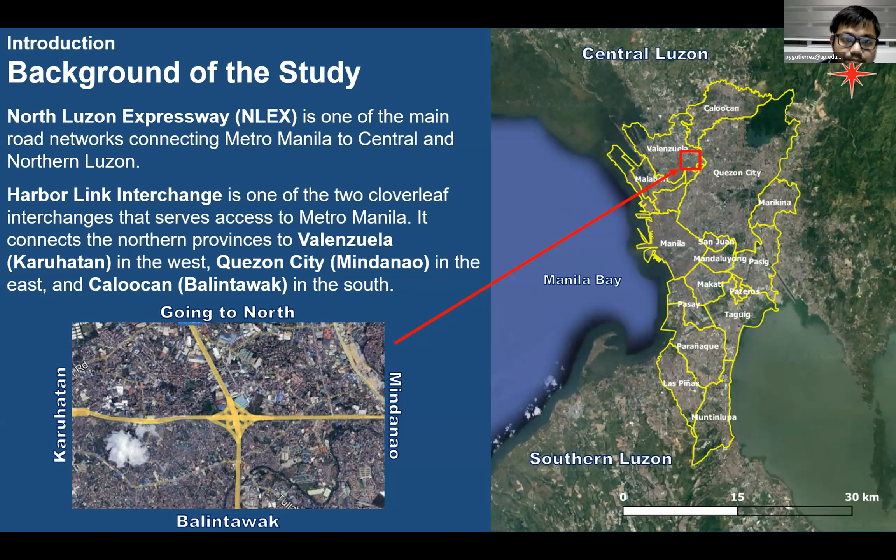For the problem statement, the general problem of this Harbor Link interchange is that with the growing economy of the northern and central Luzon, and the Port of Manila's growing economic activity, the Harbor Link interchange is the critical point of those two locations, because the Port of Manila has direct access to this Harbor Link interchange.

So if you're coming from the Port of Manila going to the north, you will pass through this interchange on the North Luzon Expressway. As indicated in the image, the blue line represents the path flow of vehicles from the Port of Manila, on the Karuhatan side, going to NLEX North. They have to use the southeast loop to go to the north.

This path flow conflicts with vehicles coming from the north going to the east side, toward Quezon City. The yellow path flow uses the southwest loop going to Quezon City, or the Mindanao area. This conflict creates a weaving section which reduces the capacity of the cloverleaf interchange and forms a queue of vehicles, as you can see in the sample photos below.

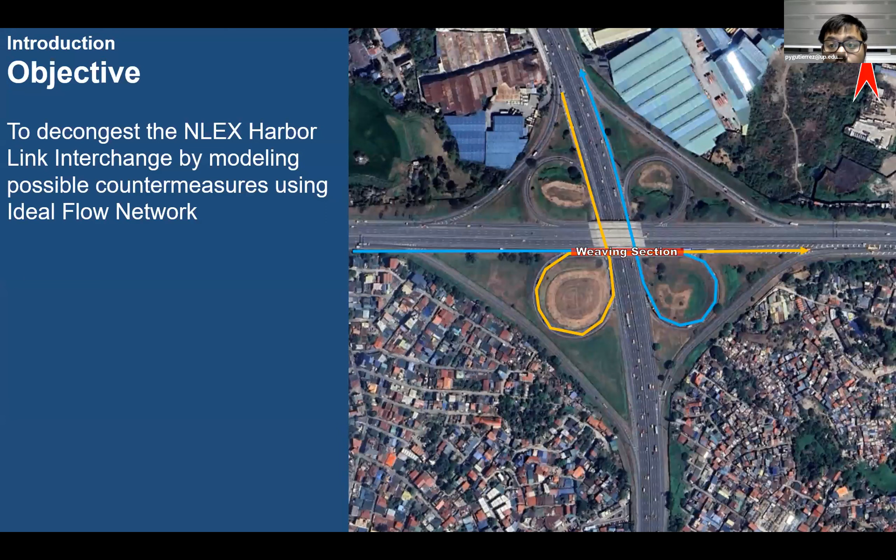The objective of our study is to decongest the NLEX Harbor Link interchange by modeling possible countermeasures using ideal flow network. Our hypothesis is that by increasing the capacity and decreasing the demand of the interchange traffic flows, the traffic flow and congestion levels will improve in this area.

So for just a brief review of related literature regarding the cloverleaf interchange. For the information of everyone here in the room, an interchange is a grade separated intersection to eliminate crossing conflicts through vertical separation.

As you may understand, in an expressway, the priority is mobility rather than accessibility. So they have to grade separate a crossing intersection in order to reduce conflicts, especially the left turning conflicts.

The rationale for the cloverleaf design is that it consists of a multi-level interchange at which all left turning movements are performed using loop ramps. The cloverleaf interchange consists of 4 loop ramps in all 4 quadrants with no traffic control.

The traffic control explained here is that there are no traffic signals, signalizations, or any other traffic control devices. So the purpose of the cloverleaf design is to allow unhampered connectivity for all movements between the 2 highways, described here as the highways above and below.

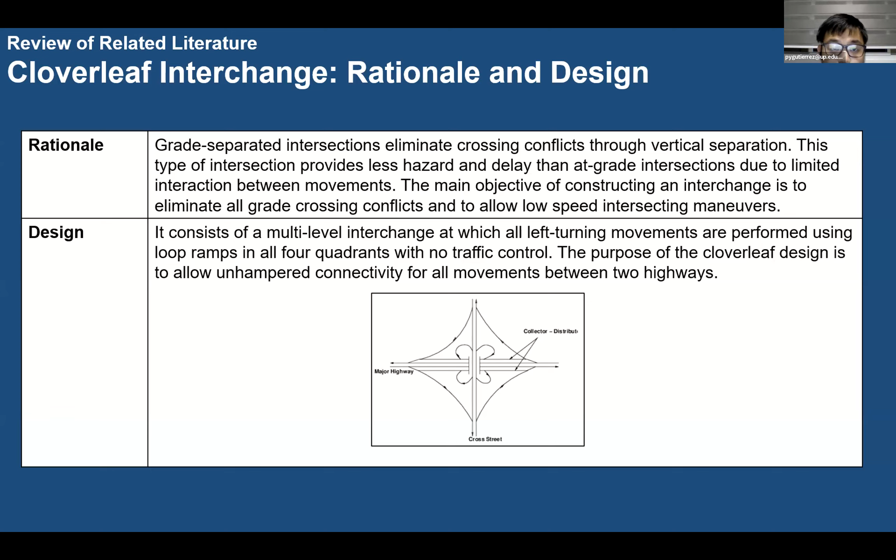For the methodology of the study, we have gathered relevant traffic and historical data, and then conducted traffic surveys. After reviewing that data and conducting the traffic survey, we analyzed the data and characterized the traffic composition that we gathered.

We have identified the peak hour, and then developed the flow and OD trip matrix of the area. Then after generating the OD matrix, we proceeded to the next step.

We did the IFN model: input of the road network characteristics, and input of the traffic data into the IFN model. Then next, we assessed the base scenario.

In the base scenario, we identified the current level of service situation, and then identified the conflict points and bottlenecks in the interchange.

After identifying those characteristics of the base scenario, we formulated an alternative, or improved, scenario.

We analyzed that alternative scenario to test if it is effective. If not effective, we go back to formulating another alternative scenario, which could be an iteration of it, or a policy introduction or other improvements. If the scenario is already effective, then we go to the conclusion and recommendations.

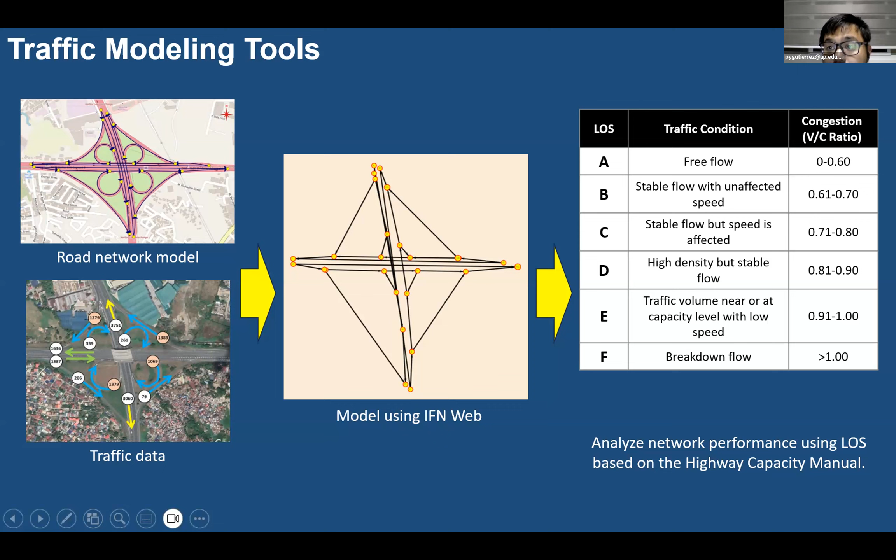So the inputs of the IFN—the nodes and links—are prepared using GIS. In the IFN model, there's an available OSM map, but during our consultation with the Professor and while learning to use the program...

the loop ramps, and not just the loop ramps but the other ramps as well, are not modeled in the OSM. So we used another GIS program, which is QGIS.

Here are the assumptions that we have. Actually, these are not assumptions, but rather the calibrations that we used.

For the ramps, the capacity that we used is 1,500 PCU per lane per hour, with a speed limit of 40 kph. And for the main carriageway or main line of the expressway, we used 2,500 PCU per lane per hour, with a speed limit of 100 kph.

These are expressway standards, and the values were obtained from the Highway Capacity Manual. Next, we input the flow matrix to calibrate the model.

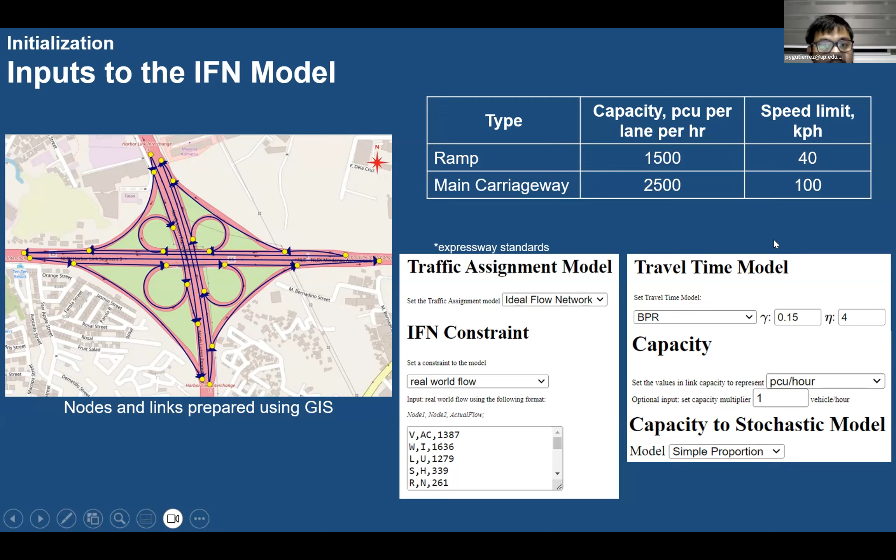In terms of turning volume, the high number of vehicles are using the southwest and southeast cloverleaf loop ramps, which was identified in the problem statement—that is, 1,379 and 1,069 PCU per hour.

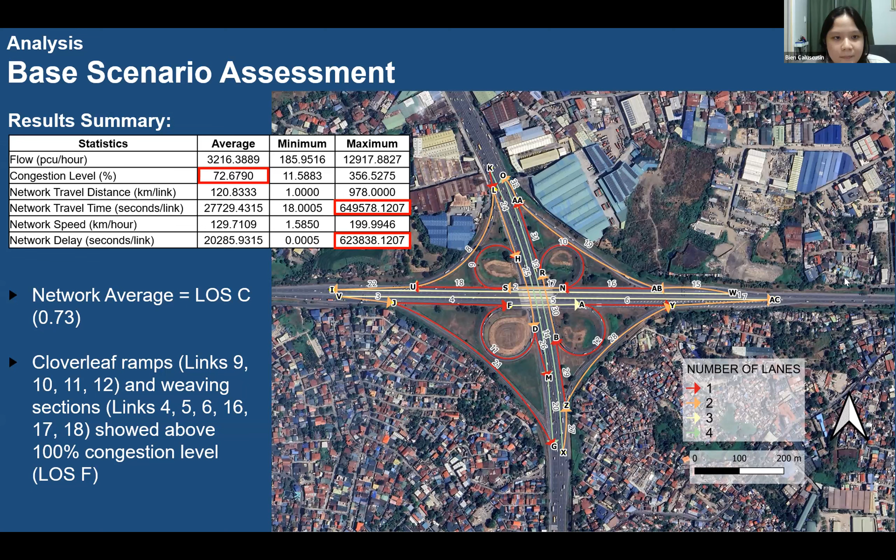As discussed, this is the visual representation of the LOS congestion for the base scenario. As you can see, all four loops have LOS F. The network suffered due to bottlenecks caused by sudden reduction of lanes and the limited capacity of the loops, since they all consist of one lane only, and the speed limit is only 40 kph. Hence, they can only serve a limited number of PCU.

These are the identified bottlenecks and weaving conflicts, which will be the focus of widening for our first alternative scenario.

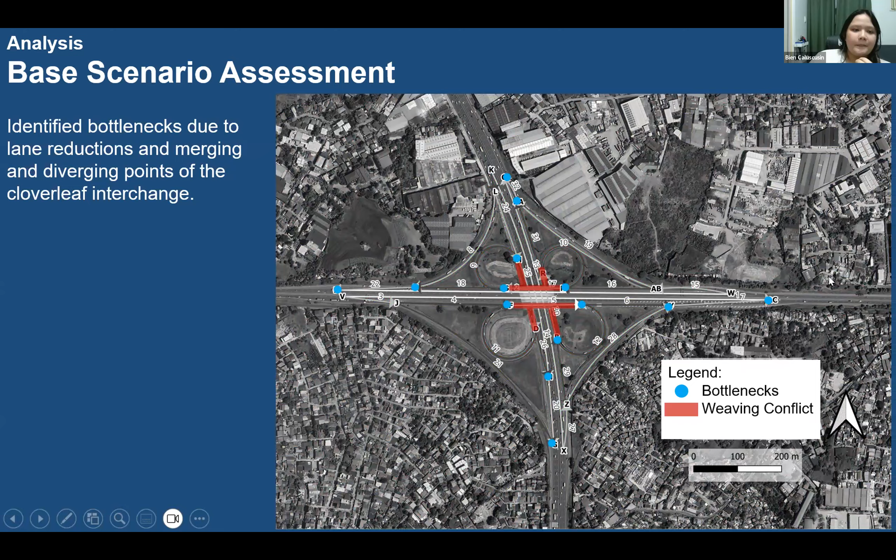For our first alternative scenario, we are proposing lane widening for the identified conflict sections, particularly the loops, all four loops, and the receiving links, including the weaving sections. We will be increasing the lanes of the loops from 1 to 2 lanes, and we'll be adding 1 lane each for weaving sections and receiving links to prevent funneling due to the sudden decrease of capacity.

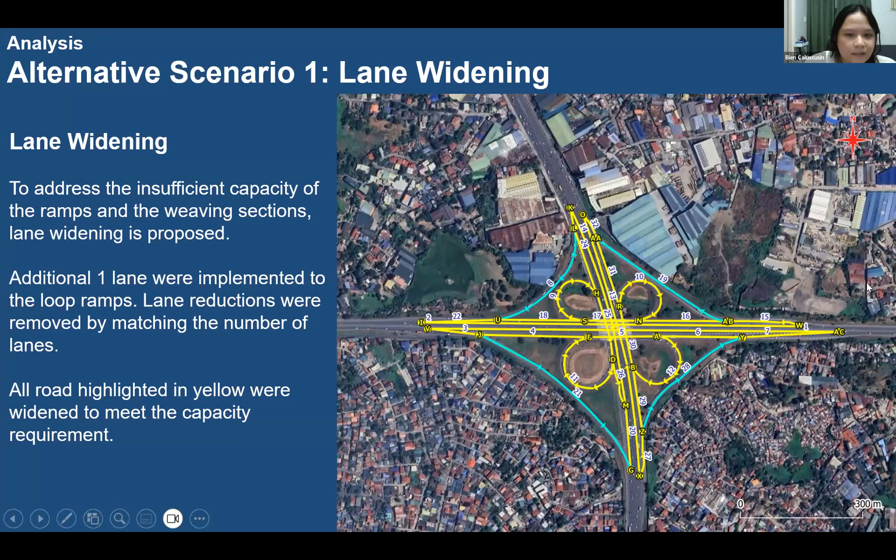For the results, this yielded a better overall network performance of almost 48%, or LOS A. However, 11 links are still experiencing more than 100% congestion.

With this, we will be assessing in the next slide additional widening to assess the further impact of capacity increase.

Wherein we added additional lanes to the identified conflicts. However, this only yielded an increase of 7% of overall network performance, and most loops are still classified under LOS F. Only one loop has a congestion of less than 100%. With this, we shall explore other countermeasures not limited to lane widening.

For alternative scenario 2, we are suggesting a bypass road from the west to the north, considering the high amount of traffic from the west, or from the Karuhatan and port area, to the north, going to Bulacan, Pampanga, or the further parts of North Luzon. This is to lessen the number of users in the cloverleaf loops.

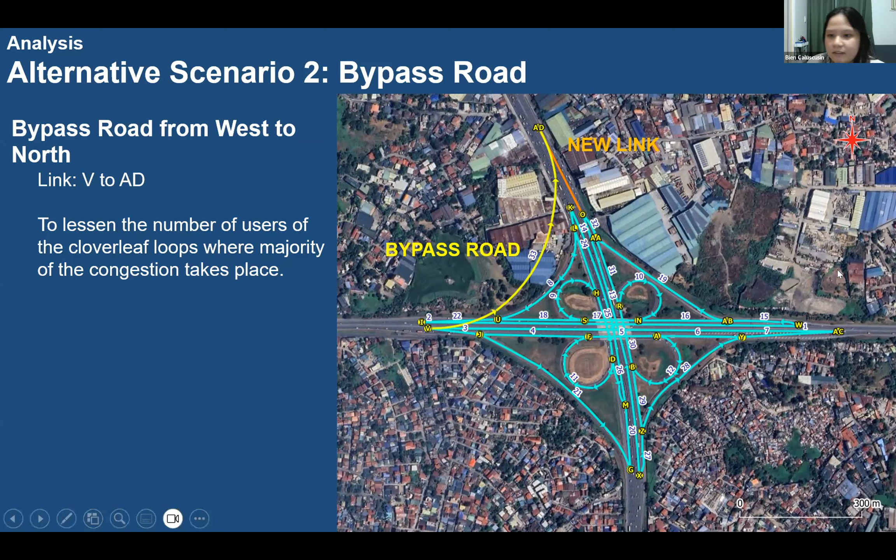However, this bypass scenario yielded a higher resulting congestion level, which could be attributed to the increase in total flow due to the additional links introduced without increasing capacity. With this, I will turn over the floor to Katrina for other alternative scenarios, which are not limited to physical interventions. Thank you.

Good evening, everyone. Since the two previous alternative scenarios may not be sufficient to solve the congestion in the network, the first policy we considered is congestion pricing. We found related literature stating that congestion pricing in Metro Manila, this is a Metro Manila study also, is expected to decrease traffic demand by 24%. So we applied this reduction to the traffic flows, and the result is on the next slide.

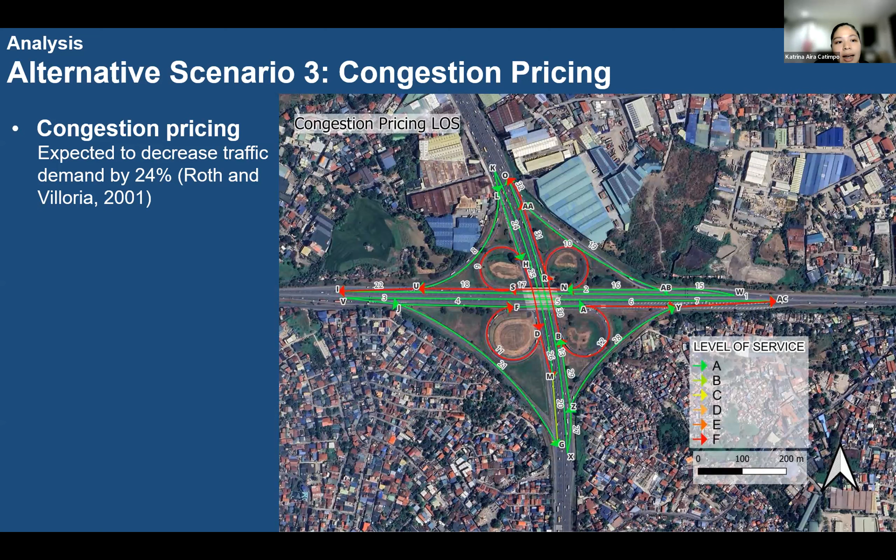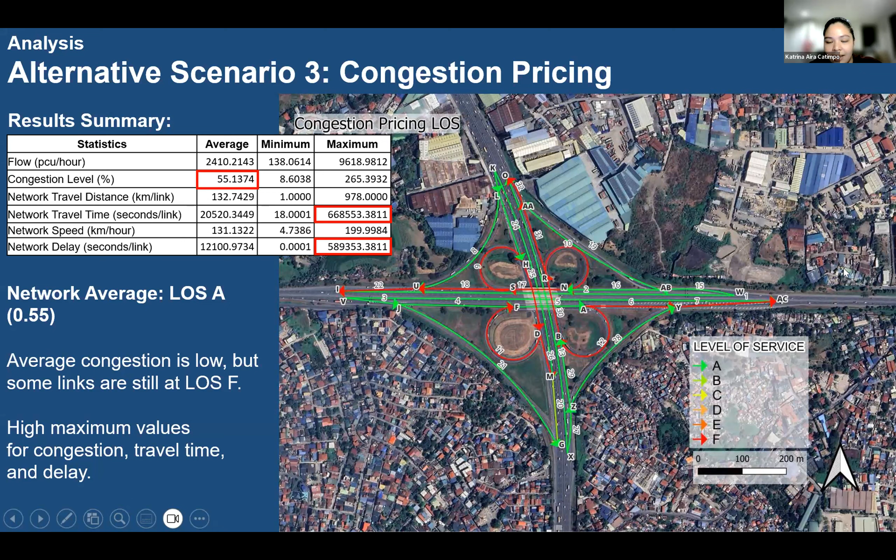The congestion level of the entire network is at LOS A, at 0.55. However, there are still links that remain LOS F, specifically the cloverleaf loops and the receiving links of these loops. So even if the overall performance of the network is good, some links are still left behind, and the maximum values for congestion, travel time, and delay are still extremely high.

For the fourth alternative scenario, we tried to combine lane widening and congestion pricing. This resulted in a network average of 0.34 congestion level, or 34%, which is equivalent to LOS A.

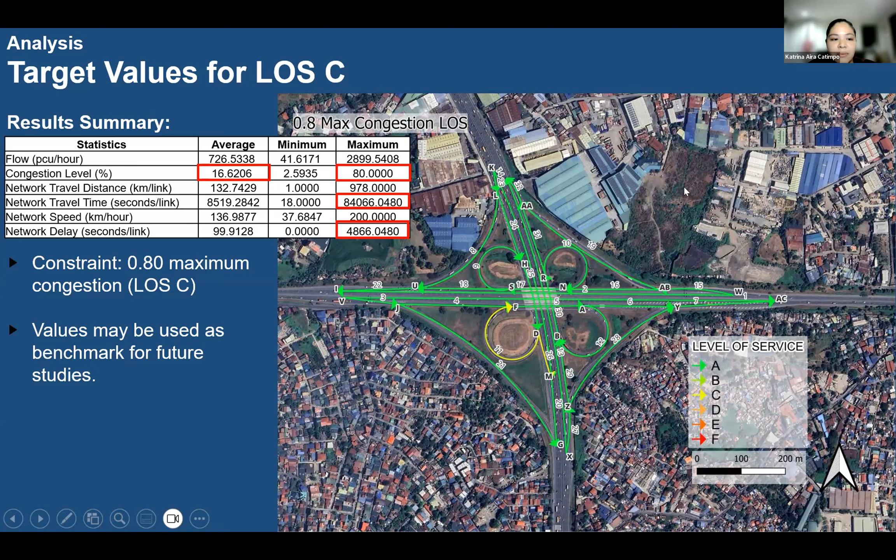Based on the results of the previous alternative scenarios, we are still a bit far from the 0.8 maximum congestion target. So in the future, more policies or countermeasures may be further explored in order to improve the results. Next slide.

Here is the summary of our conclusions and recommendations. First is that the most effective scenario of the four we modeled is the combination of lane widening and congestion pricing.

However, we have a disclaimer that lane widening may entail high costs for right-of-way acquisition, construction, and operation. It may also induce additional traffic that will further congest the road network as time goes by. Also, even if the LOS of the entire network is within the acceptable range, there are some links that experience congestion, long queues, and extended travel times.

As discussed in class, we can also explore traffic redistribution methods. And lastly, other measures may be considered, such as a proposal of a different interchange configuration, encouraging the shift to public transport, and other traffic management policies.

So that's it for our report. Yes, this is excellent. Thank you. Is there any comment or question from other groups? Go ahead, please. Anyone?

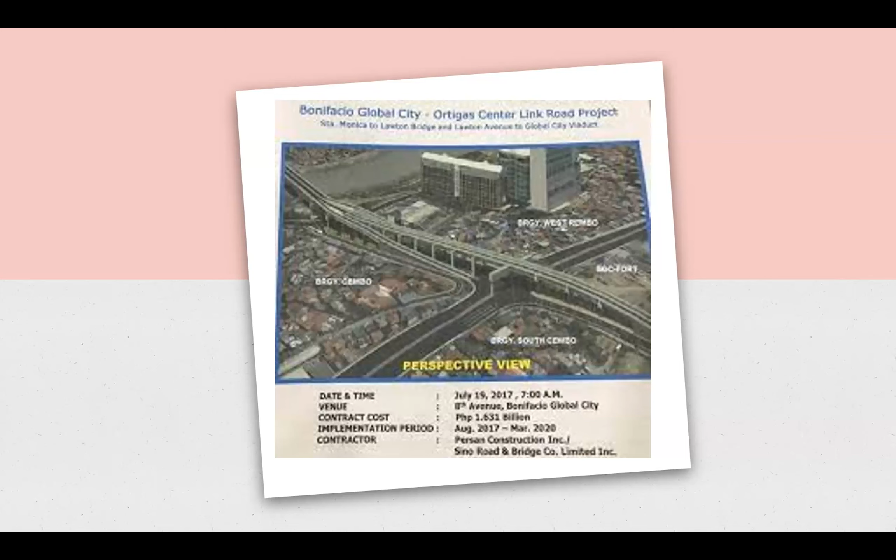Some background on the area: Kalayaan Avenue Lawton Bridge is part of the BGC Ortigas Center Link project, aimed at reducing travel time between BGC and Ortigas Center to 12 minutes, down from a projected 30 minutes to 1 hour. That's quite a big ask. This is part of a bigger government project tied to EDSA's decongestion program, which aims to bring EDSA traffic down to around 288,000 cars per day by introducing other roads for traversal instead of EDSA. This area is relatively busy during rush hours, and traffic has worsened after construction of the BGC Ortigas Bridge, introducing congestion to relatively narrow streets, especially on the Ortigas side.

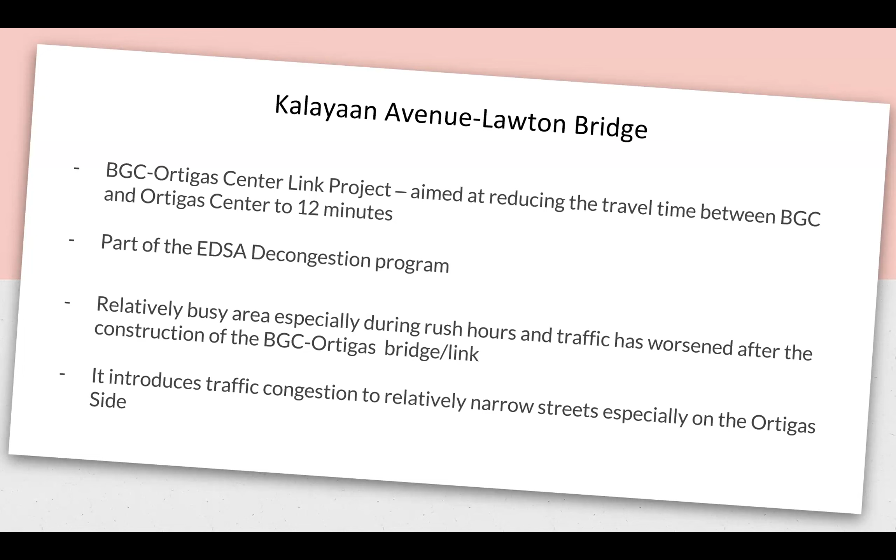The methodology of this project is to simulate the flow in the area using a transport model, to address congestion and provide alternatives. The main method used was the IFN transport model with real-world data derived from OpenStreetMap, and through GIS, the OpenStreetMap data was manipulated to input into the IFN transport model.

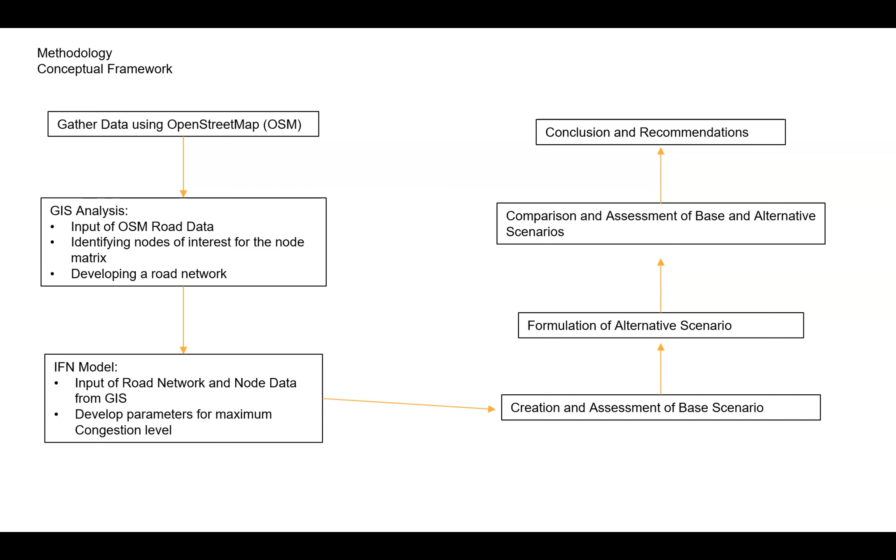This is the conceptual framework: first, we gathered data using OpenStreetMap, then using GIS analysis we input the OSM road data and identified nodes of interest for the node matrix. After that, we developed a road network in GIS to input into IFN. For the IFN model, we input the road network and node data from GIS, and developed parameters for maximum congestion level. Next was creation and assessment of the base scenario, then formulating the alternative scenario, comparison and assessment of base and alternative scenarios, and finally conclusion and recommendations.

For the assumptions on the link matrix, we use the data imputation settings in IFN so that we can estimate the link capacity, the max speed, and the road width for every single link.

I was able to come up with one alternative scenario. As you can see on the left side, this is the alternative scenario.

What I did was I added the U-turn slot at the 8th Avenue corner 38th Street on the bottom of the model, added extra lanes for Fairlane Street on the Ortigas side and Lawton Bridge, and then transferred the U-turn slots in Kalayaan Avenue on both sides further away from the intersection.

So I had to change the length of the links, and then added Brixton and Pioneer Street to balance out Fairlane on the upper side of the model.

Here's the output for the alternative scenario. The total flow is set at what the previous base scenario was, the sum of that - 131,811.68. Running through the model, we found that the alternate scenario has a maximum congestion of only 78.45%.

as opposed to the previous 90% from the base scenario. The congestion level before in the base scenario was at 47%, and the average this time is 35%, also a 12% reduction from the base scenario. The network speed is at 56.23 kilometers per hour, which is slightly better than the base scenario.

Here are the comparisons of the previous model. I added Pioneer and Brixton streets on the upper portion of the model in order to decongest the area on the flyover.

Rather than just directly going into the final result, probably you can tell the story. How did you get this alternative scenario? Oh, okay. Do I tell them right now?

First, I added a U-turn slot at the 8th Avenue.

On the bottom of the model, you can't U-turn here from the bottom. You have to go to 38th Street to go back to the bridge. So I added a U-turn slot there. I don't know if that's legally impossible, but I added that.

And then for the area with the orange street, I transferred that. In the base model, the U-turn slots are usually closer to the intersection.

But in the alternative scenario, I moved it further away into Kalayaan Avenue, so the links are no longer suppressed or compressed.

After doing that, I found more congestion on the upper area, so I had to do a lot of manipulation into the base scenario. That's why there's a lot of links and nodes added here.

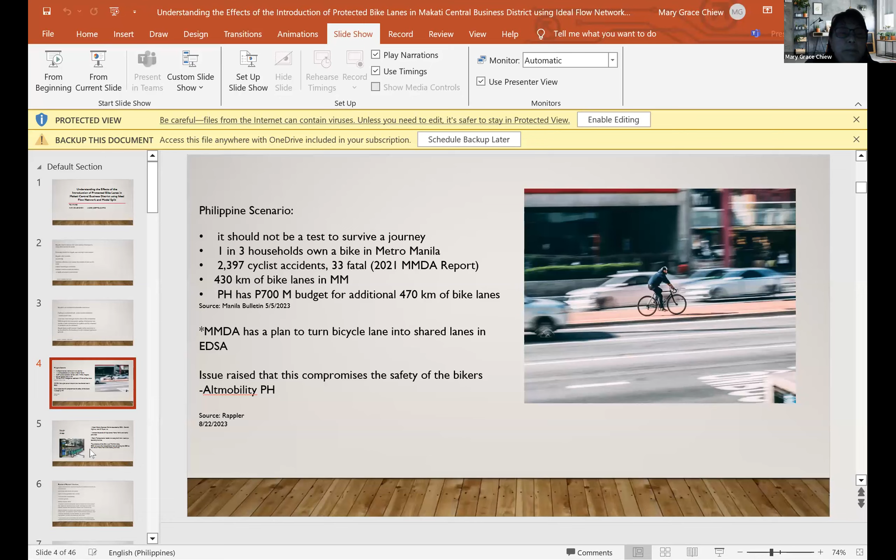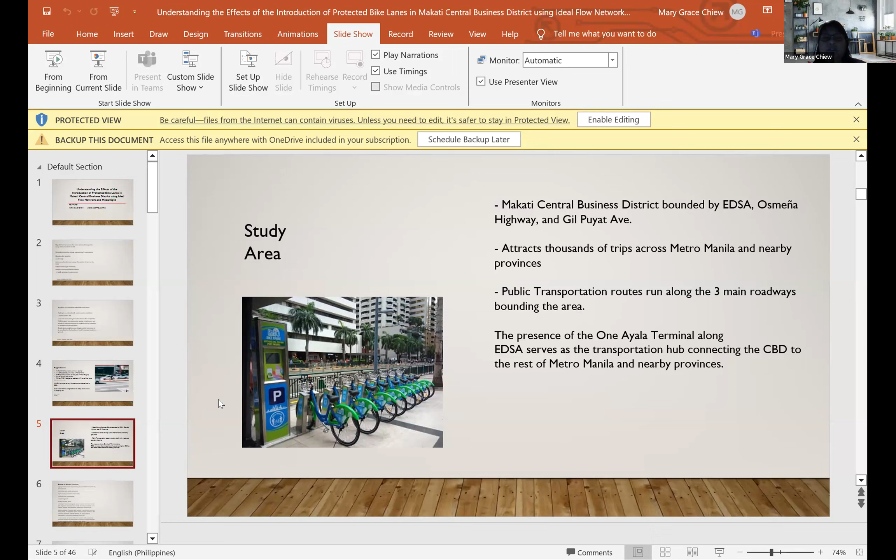Our study area is the Makati Business District bounded by Osmeña Highway and Gil Puyat, which will be explained in detail by Andre later on. It attracts thousands of trips across Metro Manila, and there is a presence of one Ayala terminal that serves as a transportation hub, with public transportation routes along three main roadways bounding the area.

We did a literature review, and most literature highly recommends implementing bicycle facilities towards city development. One study in Metro Manila on the economics of implementing bike lanes did a review on bicycle policy, and their results show that implementing bike lanes resulted in reduced crash risk, improved cardiovascular health, decongested traffic, created less carbon footprint, and increased tourism and employment.

The implementation of policies and facilities is predicted to resolve heavy traffic, air pollution, citizen cardiovascular problems, and vehicular accidents in Metro Manila, as well as reduce expenditure on both individual and city levels. They recommended that more policies are needed that cater to both cyclists and motorists to achieve an efficient citywide cycling transport system.

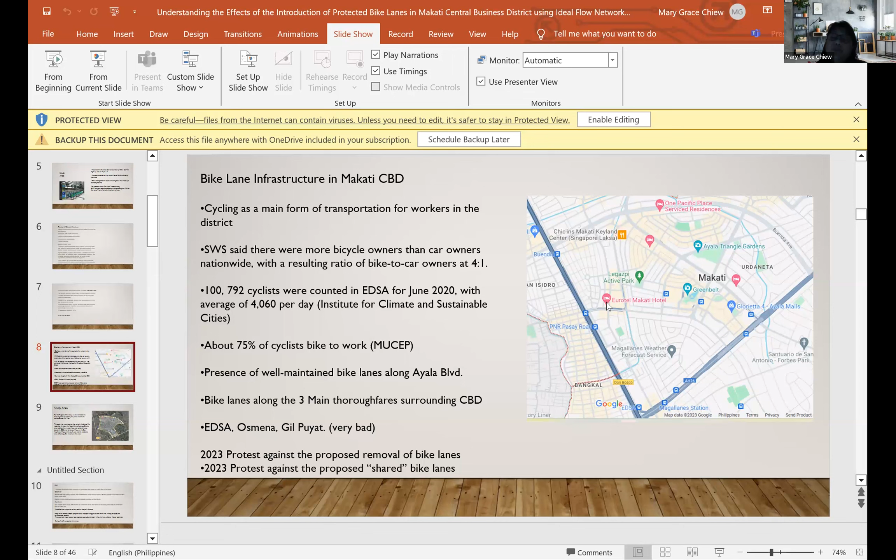The aim of this study is to simulate the effect of the presence of protected bike lanes on traffic flow in the area, with the objective in mind that the results of the simulation will help policymakers and stakeholders in the area to have a clear picture of the effect of bike lanes, and will lead to a more stable perspective and attitude to policy on bike lanes.

This is because if you make a review of the news articles on bike lanes in Makati CBD, you will find that in spite of the presence of the bike lanes, the policymakers and the residents have a push-pull attitude towards it. There have been times that they would introduce bike sharing or remove the bike lanes, and it has always been met with protests.

So this study is significant because if we simulate traffic flow with the presence of the bike lanes in the study, it is shown to help or hinder the traffic in the area, and if bike lanes are proven to be a possible positive change, it would help entice and move more people to cycle instead of using private cars, leading to health and environmental benefits, and promote multimodal use and lead people to use public transport in lieu of private vehicles. All with the hopes that it will ease the traffic congestion in the area.

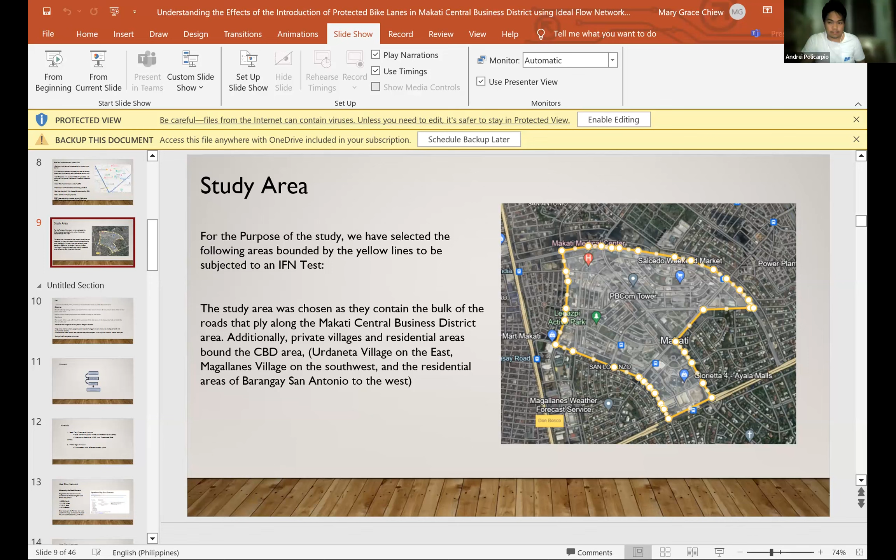So go back to this. Can you go back to yours? This one, okay. So to generate the road network, we used the OpenStreetMap data processor to manually derive the road network using the ideal flow website. I forgot to put the link, but it's the website that we used for that.

So to generate the road network, we used the following bounding box, which is the bounds of the CBD area we wanted, and we only used roads of the tertiary level, as these are the roads that can accommodate heavy traffic flow.

Okay, so using that geographic bounds, we got this map. And using the above parameters, we were able to generate a road network comprising of a whopping 966 individual nodes and 1,446 total number of links.

So it can be noted from here that not all roads inside the CBD were detected by the IFN website. For us, we decided to still continue using it, as we noticed that it did not include the small service roads that connected the inner parts of the CBD, which is okay since we just wanted to use tertiary roads.

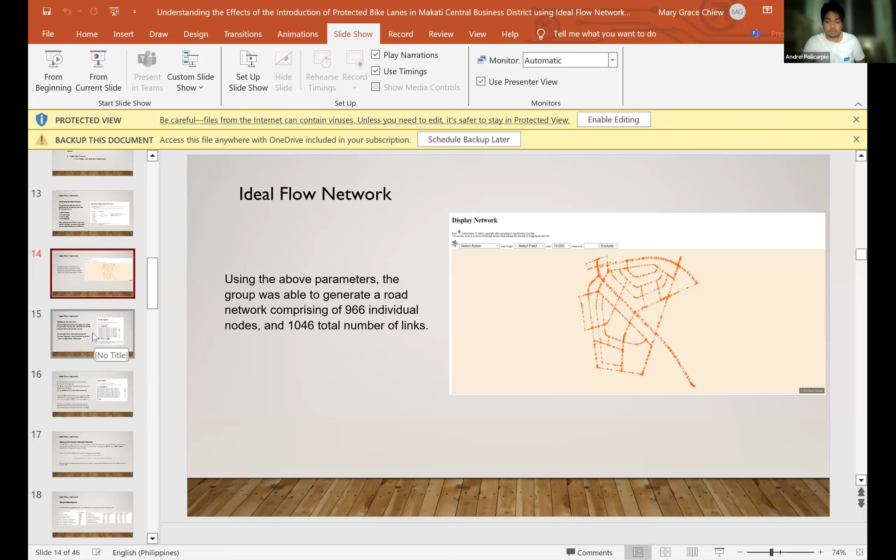As can be expected, having 900 plus nodes, setting up the network required lots of automation, so we did not bother to check all the nodes since it would take lots of time. We just glanced at it and zoomed at the map overall and found there are nodes. We used it since we did not bother making edits as to potentially derail the entire modeling.

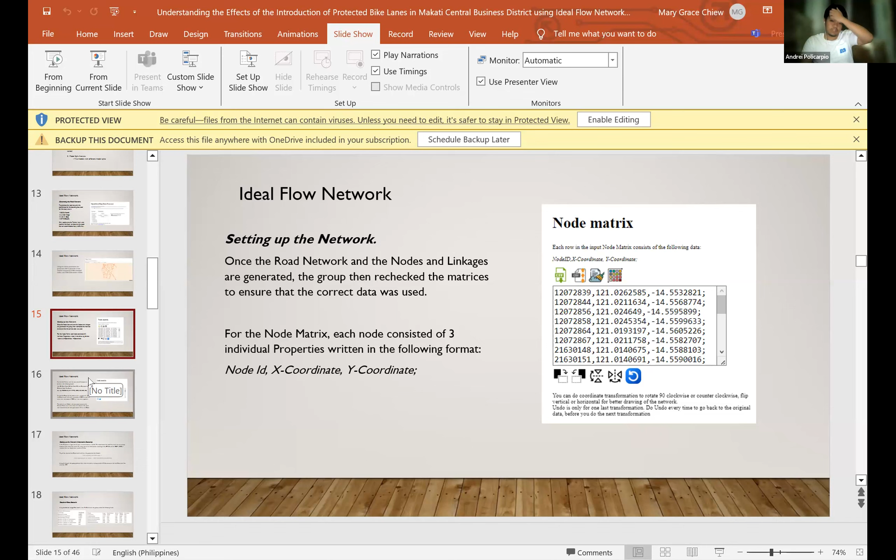So setting it up, we needed the node ID, X coordinate, Y coordinate, and the ideal flow for the linkages. This is where we had to do some editing since it consisted of link capacity, link distance, and max speed. For the link distance, it was manually computed by the website.

As for link capacity, we checked. We did some checking actually, so it was not fully automatic. We confirmed somewhat the capacities of the road networks, and found that the website used a standard of 1,500 link capacity per lane, and the minimum road size for the node matrix was 2 lanes. So the minimum link capacity was 3,000 for a 2-lane road.

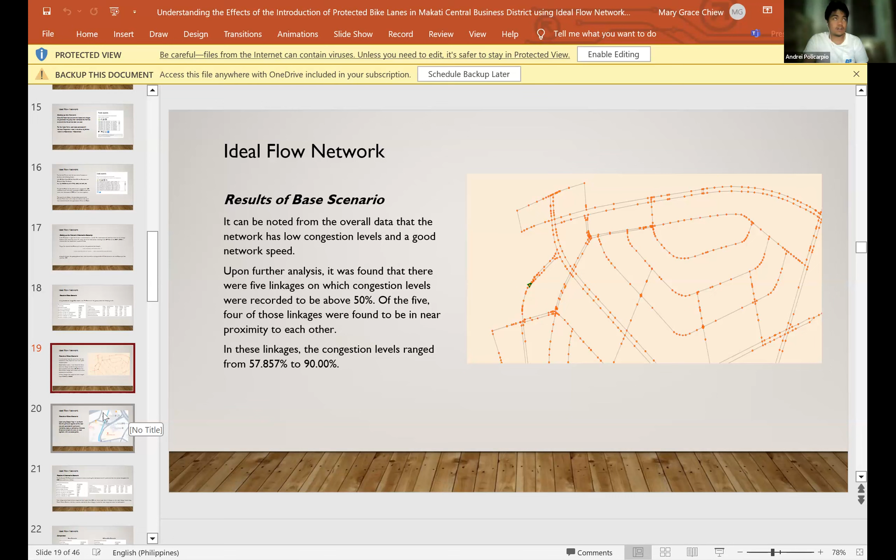If you can see in the image, there's a green arrow. It points to a particular part of the road that had 4 of the 5 linkages with above 50% congestion, and these linkages had 57.86% to 90% congestion levels on that single part. So of all the 1,000-plus linkages, only 5 had above 50% congestion, and 4 of those were in that particular area.

For the next part, we used an alternative scenario. For the second model, we used a lower link capacity. This is what we got.

So total flow was at 447,000, and congestion levels actually went down to 12.6%, while maximum congestion level was still 90.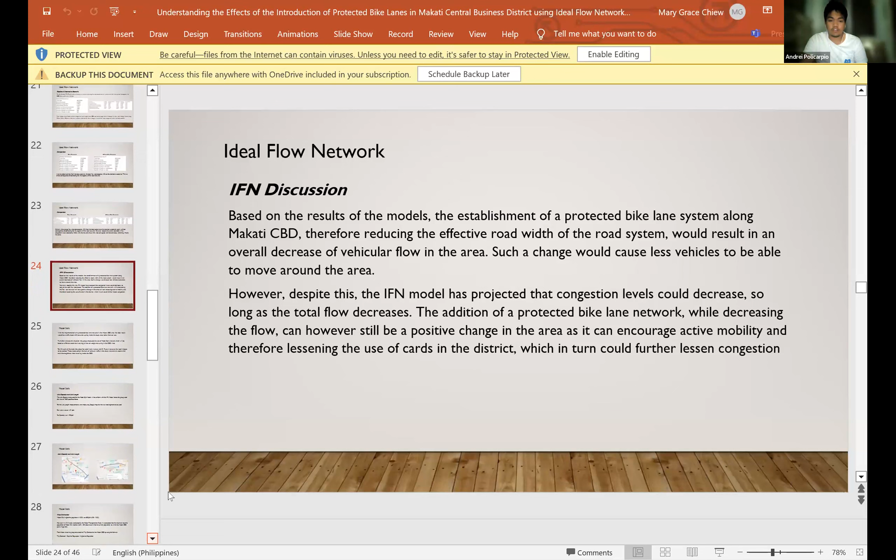However, despite this, the model has projected that congestion levels would decrease so long as total flow decreases. So the addition of a protected bike lane network, while decreasing flow, can still be a positive change in the area, as it can encourage active mobility, lessening the use of cars in the district and overall reducing congestion. So these are our initial findings for the model. Next, we used a modal split analysis.

Initially, what we wanted to do was connect two studies, but upon doing it, we were unable to actually connect the two processes. We were unable to find resources to connect these two. We initially wanted to do a modal split, but despite not being connected, we wanted to analyze it further, so we decided to use another analysis method for the study.

So for the modal split, we used Ayala Avenue and Gil Puyat Avenue as the road linkages to be studied. These roads contain the bulk of vehicular traffic in the study area and are used as the main thoroughfares when traveling inside the central business district.

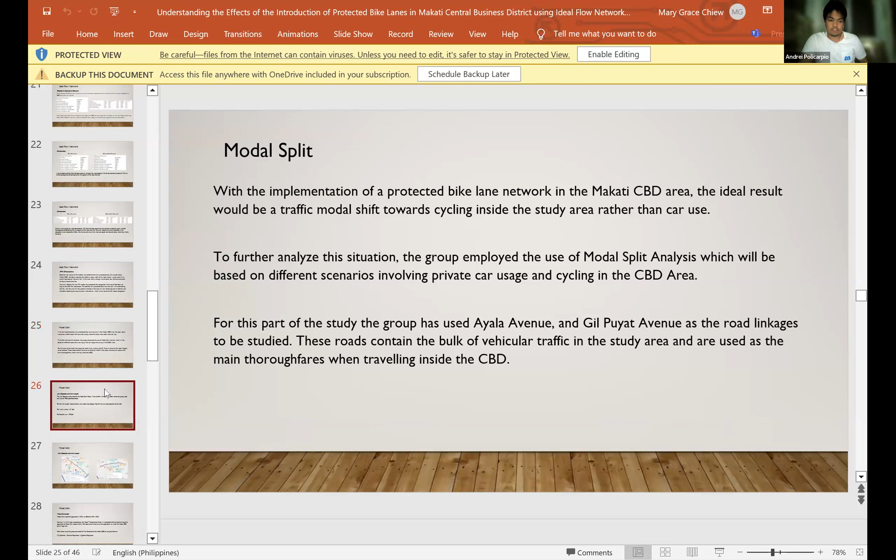For the link capacity, we used the same value from the IFN model of 1,500 PCEs per lane. For the link length, measurements were made using Google Maps for the two road segments to be used. Ayala Avenue was found to be 1.91 kilometers, and Gil Puyat, 1.78 kilometers.

Okay, so next, you can see this length. Okay, so next.

For trips demanded, based on the Philippine Statistics Authority census of 2020, Makati City's nighttime population in 2020 was 629,616 — meaning the population that resides in the households. However, in a 2012 study conducted by the Makati Transportation Study, it is projected that the maximum daytime population of Makati City is a whopping 4 million plus people, or about 7 times its current population, to which the Makati CBD plays a huge role.

We initially wanted a more up-to-date number, but unfortunately we were unable to find a figure close to 2020 or any later year, with 2012 being the latest one we could find.

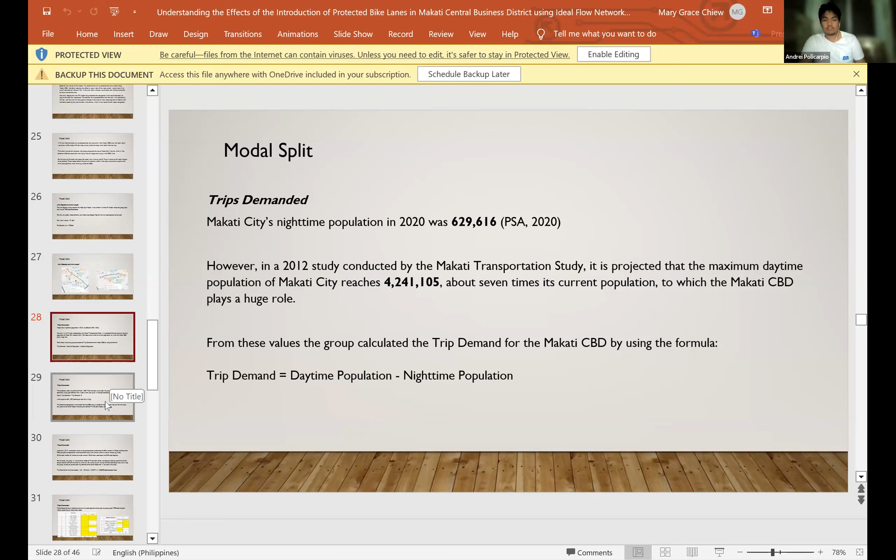From these values, the group calculated the trip demand for the Makati CBD using the formula: trip demand equals daytime population minus nighttime population. So we simply wanted to know how many people were not residing in Makati City households but were working in Makati.

For the trips demanded, this produces a total trip demand of 3,600,000. But for the modal split analysis to work, we needed an hourly trip demand, to which we divided it by 8.

Using 8 hourly time windows — 4pm to 5pm, 5pm to 6pm, 6pm to 7pm, and so on up to 12 midnight — we divided by 8, which equals 451,437 demand per hour for all trips.

So it's a lot, and the demand encompasses all trips made to the CBD using all modes of transportation. However, for this study, we only plan to analyze 3 modes: private cars, buses, and jeepneys.

Asinas et al. conducted a study on the transportation preferences of office workers in Makati and found that 72% use public transportation and around 27% use private vehicles, either owned, rented, or TNVs. Of the total workers surveyed, around 13% use buses and 24% use jeepneys.

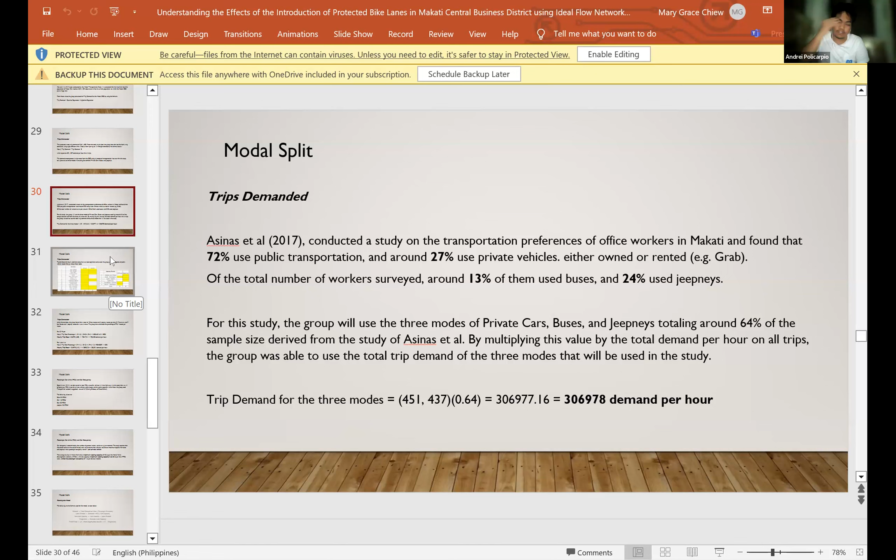So next, we distribute the hourly demand along the two road segments that we used, using the LTFRB data of public vehicle routes that lie along these roads.

We checked LTFRB to get the bus data — the bus routes running across these road segments. Of the 15 bus routes that lie along the study area, 15 pass through Gil Puyat, while 9 pass through Ayala Avenue. For the jeepney routes, of the 6, 3 pass through Gil Puyat and 4 pass through Ayala Avenue.

So what we can gather is, when we combine the data, these 6 jeepney routes are responsible for around 24% of the total demand, as per the Asinas et al. study which we used.

So next, trips demanded. Using the said data, for the hourly trip rate percentage, we used the total number of PUVs plus PUJs traveling along Gil Puyat, divided by the total number of PUVs and PUJs, and found that 58% of the PUVs and PUJs travel along Gil Puyat, while 42% use Ayala Avenue. This is how we will split the trips demanded.

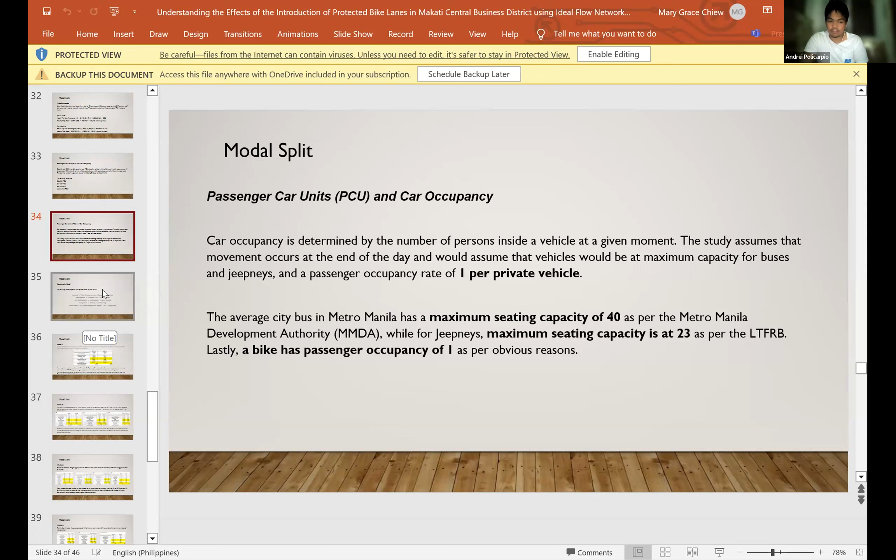Is it possible to focus on your bike lanes? Yeah sir, we tried to focus on the bike lane, but we found it hard to use the modal split on the bike lanes, plus because of the values we got. So if you can skip to slide 39. Okay, it seems you have two separate studies that are not connected.

It actually turned out that way, sir. But we wanted to study bikes. However, upon using bikes, it was hard since public transportation was also used along the main lanes. We actually wanted to make the modal split analysis and focus on the IFN, but we spent a lot of time on it, so we just wanted to show the results, even though it wasn't actually that useful to us.

We can discuss that later separately, is that okay? We actually wanted to find a link between the two, but unfortunately we were not able to find a link. But since the computations we made, the effort we put in, we wanted to include it. For now let's just skip that part and go to the conclusion.

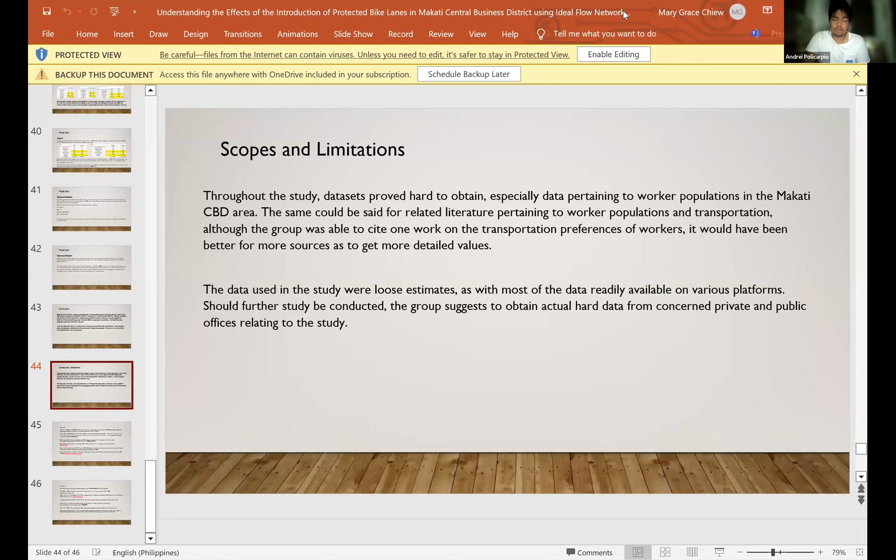Lastly, regarding problem scope, one thing we found hard for the study was the actual size of our study area. If we were to rerun the study, we would probably have limited the study area to a more compact one, so as to properly capture it.

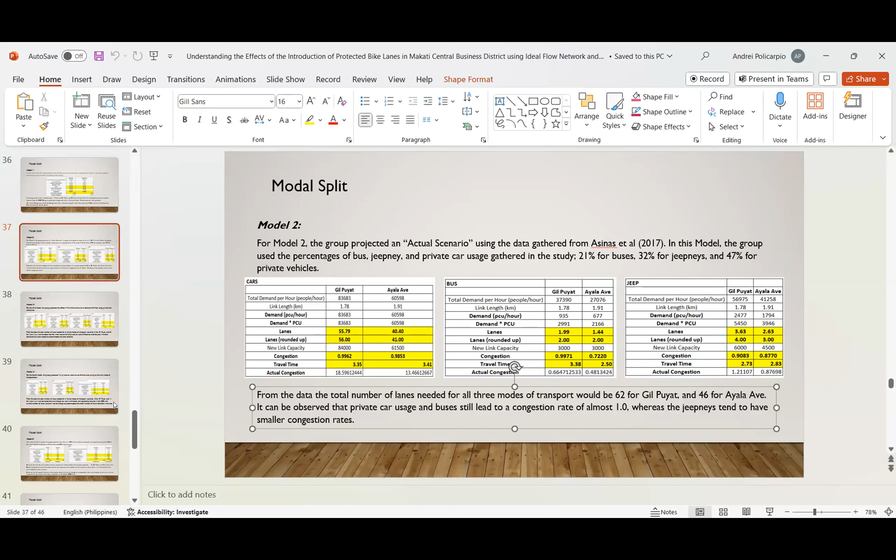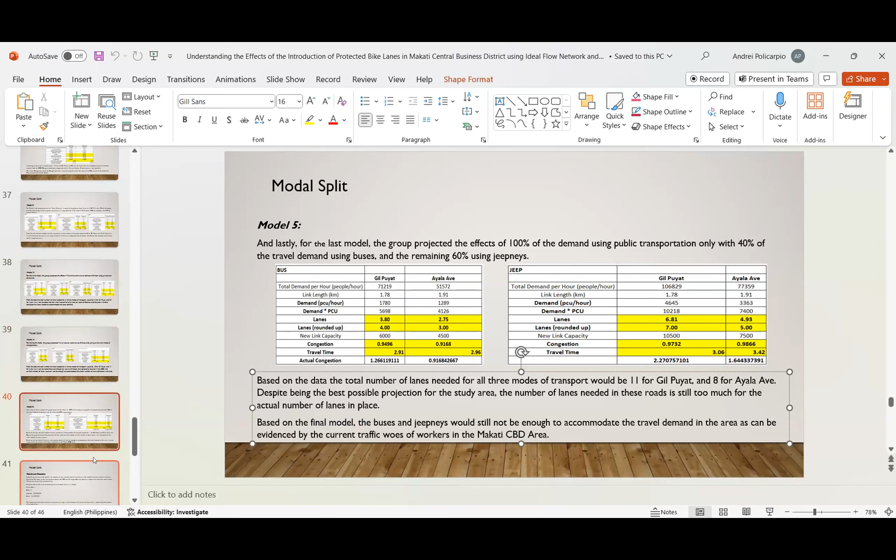So you mentioned earlier that actually public transportation is a better alternative than the bike lane, is that correct? Yes, yes, sir. So but I did not see that in your conclusion that you wrote. Sir, it was in this. So yeah, in here you did not say that. As for the modal split results, it was found that public transportation is the best solution for this, besides the bike lane being complementary. I see, okay. So the public transportation is the best, maybe the wording needs to emphasize because it seems like you emphasize the bike lane, but actually the best is public transport.

And actually, sir, our scenario 2 is a mix of bicycles and transport cars in the area, it was not 100% cars. So we just, the probably the way you write is only the problem. The analysis is fine, but only the way you write can emphasize a different matter. I realized, sir, the way the methodology was set up was actually getting into that.

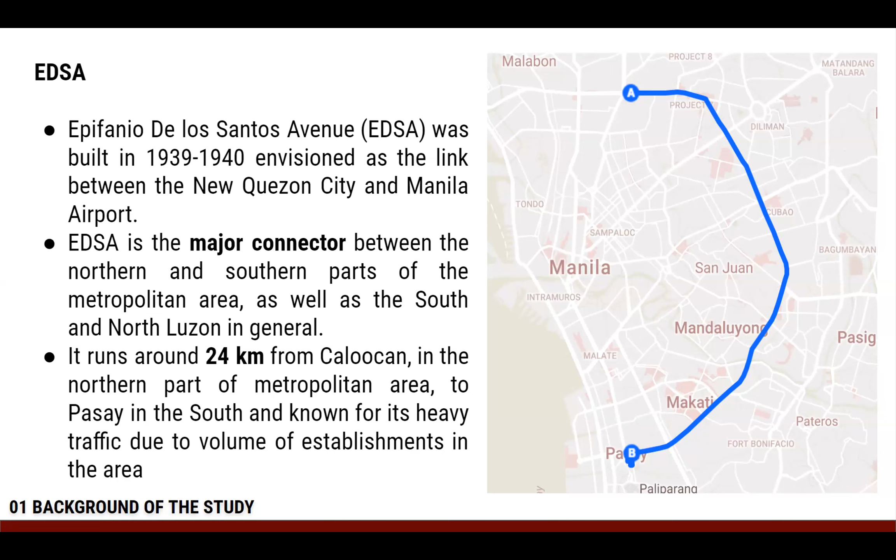For the current EDSA traffic situation, based on the latest report from MMDA, the average daily traffic generated in EDSA already reached around 410,000 vehicles in 2022. The average speed during the GCQ period is at 27.6 kph for northbound and 31.57 kph for southbound.

Due to this traffic situation, various initiatives have been implemented, such as the EDSA Carousel, a bus rapid transit system in Metro Manila. The interim operations began on June 1, 2020, and full operations began later on July 1, 2020.

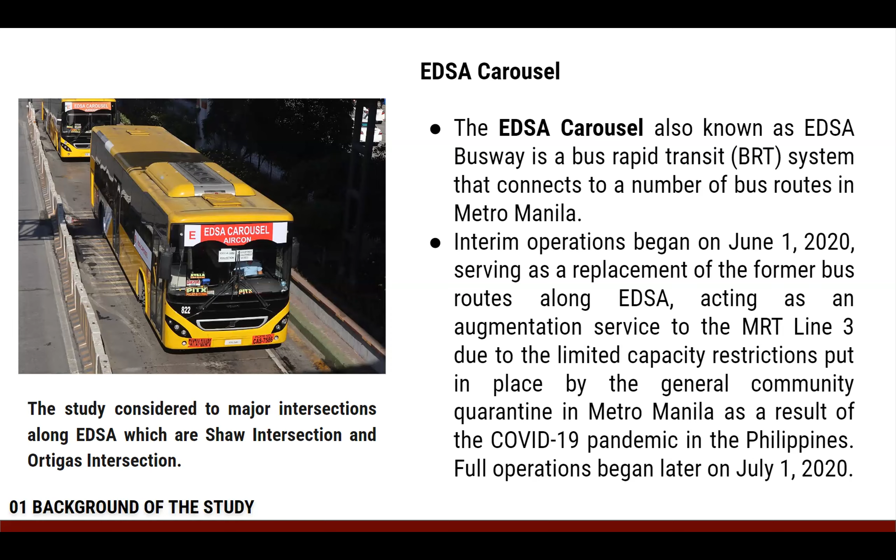In our study, we consider two major intersections along EDSA, which are Shaw intersection and Ortigas intersection. Our study aims to investigate the effectiveness of increasing the capacity of the current bus lane by adding a dedicated bus lane and increasing the capacity of the bus unit along EDSA.

For the research question: how will these scenarios impact and reduce traffic congestion along EDSA? Our specific objectives are to assess the impact of expanded bus lane capacity on traffic flow, congestion level, and travel time along EDSA; to assess the impact of introducing an additional dedicated bus lane; and to compare these results to recommend the most desirable scenario for implementation along EDSA.

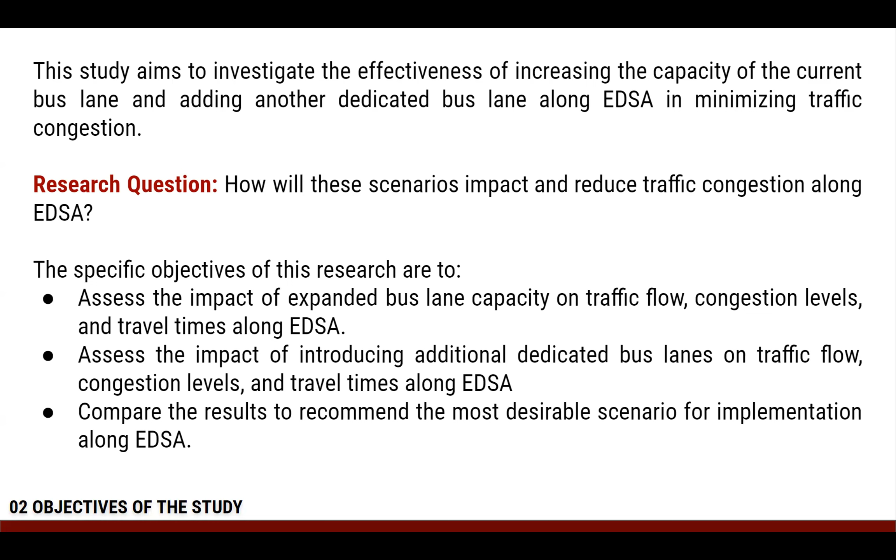For our methodology, the first part is network modeling and development of matrices. Using Google Maps Street View, we are able to examine the traffic flow and set the different nodes of our network. The different nodes were set based on the number of lanes, change in the number of lanes, lane merging or diverging, and different intersections. The geocode location of the identified nodes were also determined using Google Maps and were used in setting up the node matrix.

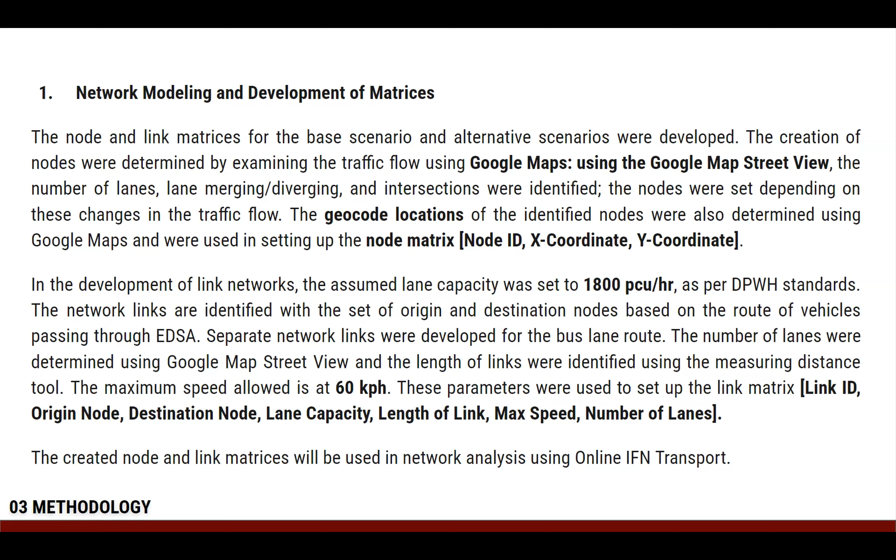The created node and link matrices will be used in the network analysis using online IFN transport. So this is a sample of our network link created.

The second part is using the online IFN transport. First, after creating our node and network matrices, we will check if it is strongly connected.

The parameters used in this model: the traffic assignment model was ideal flow network with the following parameters. The maximum congestion level for the base scenario was at 90%, using the BPR travel time model, with lambda equals 0.5 and mu equals 0.4. The capacity to stochastic model is just a simple proportion.

After getting the results in our base scenario, the total flow will be used in determining the congestion level of our alternative scenarios. The first alternative scenario is increasing the number of bus lanes from 1 lane per direction to 2 lanes per direction. The second alternative scenario is increasing the capacity of the bus unit using double-decker bus units.

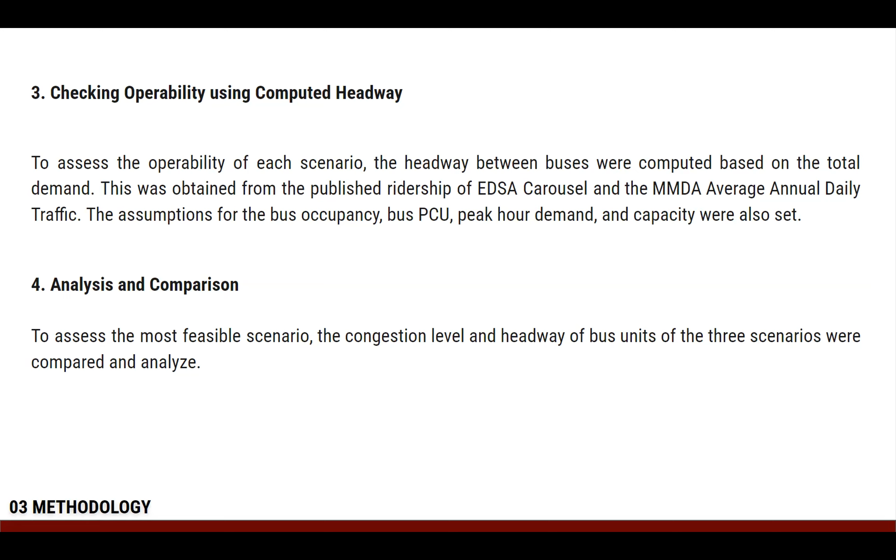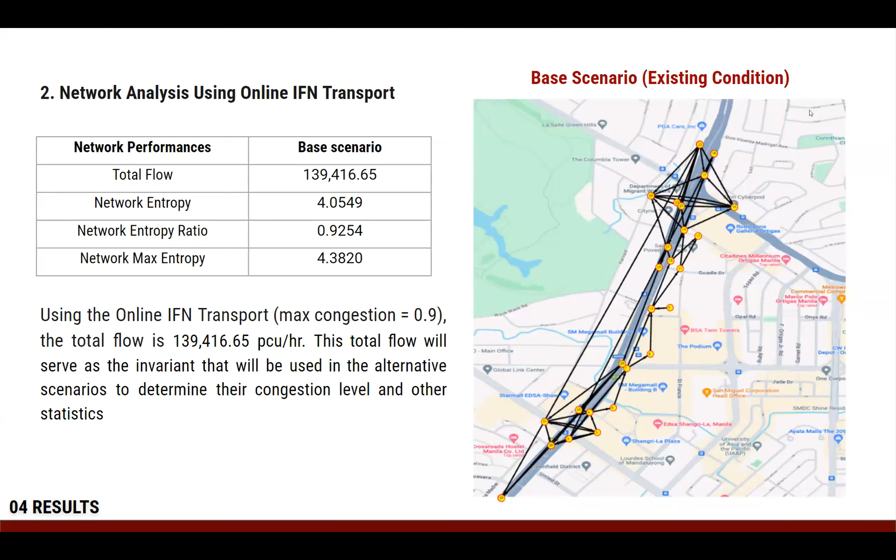The base scenario, given the parameters that Miss Nina has mentioned earlier, we got these values for the total flow: 139,416 PCU per hour for the total flow, and other values for the network entropy, network entropy ratio, and network max entropy. So the total flow was used as the invariant for the alternative scenarios to determine the congestion level and other statistics.

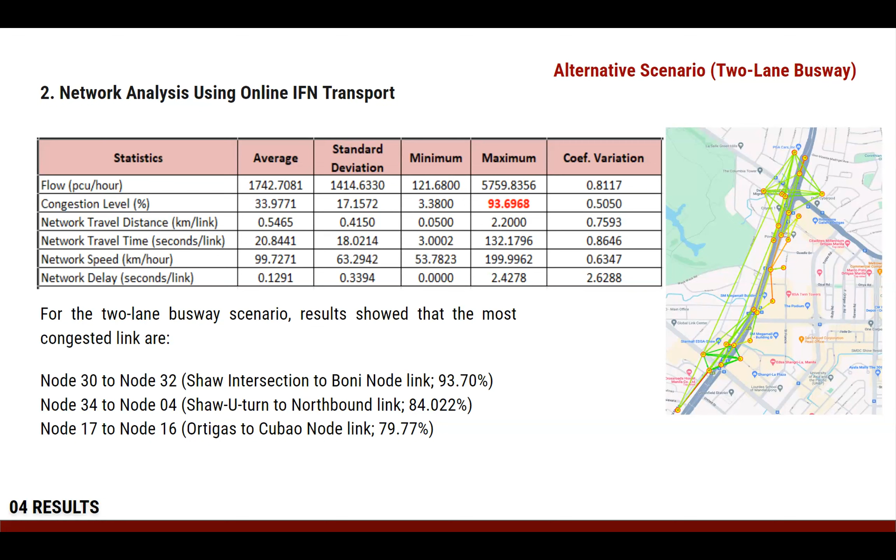We just doubled the capacity of bus lanes. We can achieve this by running a double-decker bus instead of the usual bus on the busway, which would essentially double the capacity of the busway. So we changed the link capacity to 3,600 from 1,800 for the busway links.

With that change, we got an average flow of 1,742.7 and an overall average congestion level of 33.98%. The maximum congestion level is 93.70%, found in the link that connects node 30 to 32, the Shaw intersection to Boni node link. The next most congested link for this scenario is the same as the second most congested link for the first two scenarios, the link that connects node 34 to node 4, the Shaw U-turn to northbound link, with 84.02%, and node 17 to node 16 with a congestion level of 79.77%.

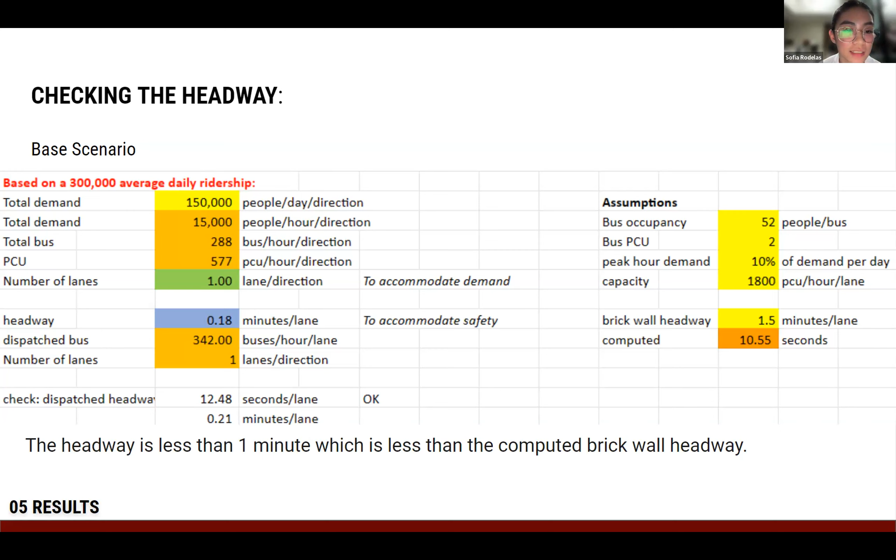For the alternative scenario of additional lane, since there will be an additional lane, we assumed a 40% shift from private vehicles to bus considering the additional capacity. We assumed 40% since based on the computed person trips from the AEDT, there is already a 40% user of bus. So just an additional 40%—we basically doubled that when we added the lane.

So the computed headway on this one is almost close to the first one, which is 12.62 seconds per lane, or 0.21 minutes per lane.

For the next one, the increased capacity scenario, we got the same results actually, but the difference here is just the bus occupancy from 52 to 104. The result was the same since, like the previous one, this was divided by 2 as well, since there will be 2 lanes already. So we also got a less than 1 minute brick wall computed headway.

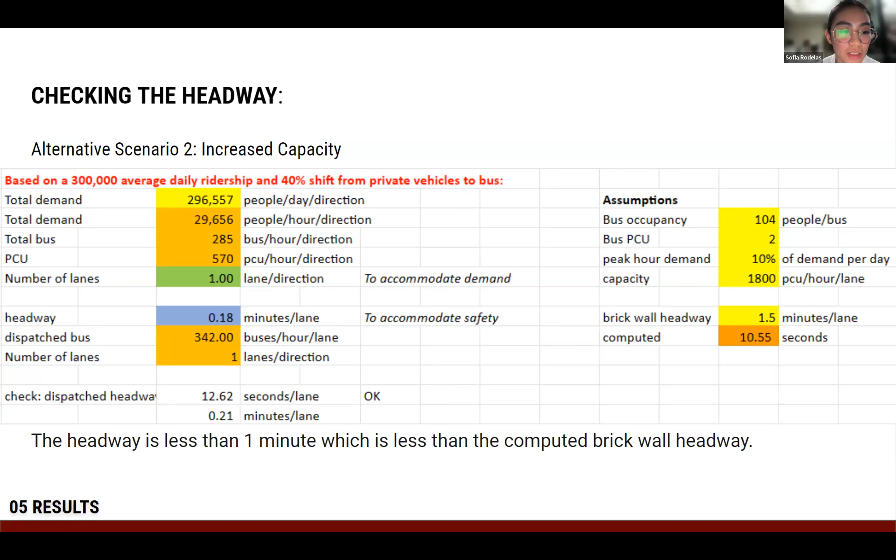Next, for the conclusion and recommendation: based on the results of the IFN, the increased bus capacity scenario is the more desirable alternative than the additional lane, since surprisingly the additional lane would even yield a higher congestion level than the base scenario, although the difference is very minimal.

To address the traffic situation along EDSA, for future studies we can explore encouraging the use of alternative routes, strict implementation of vehicle volume reduction schemes such as number coding, exploring other means to discourage car ownership or usage such as through taxes, additional registration fees, and road pricing systems, car ownership regulations such as a vehicle quota system, and encouragement of the use of rail and busway public transportation and other modes such as active transportation.

Also for our study, future recommendations include conducting a comprehensive cost-benefit analysis to assess the feasibility of the proposed interventions, using OD matrices along the links for more accurate comparison if available, and expanding the study to include the whole stretch of EDSA.

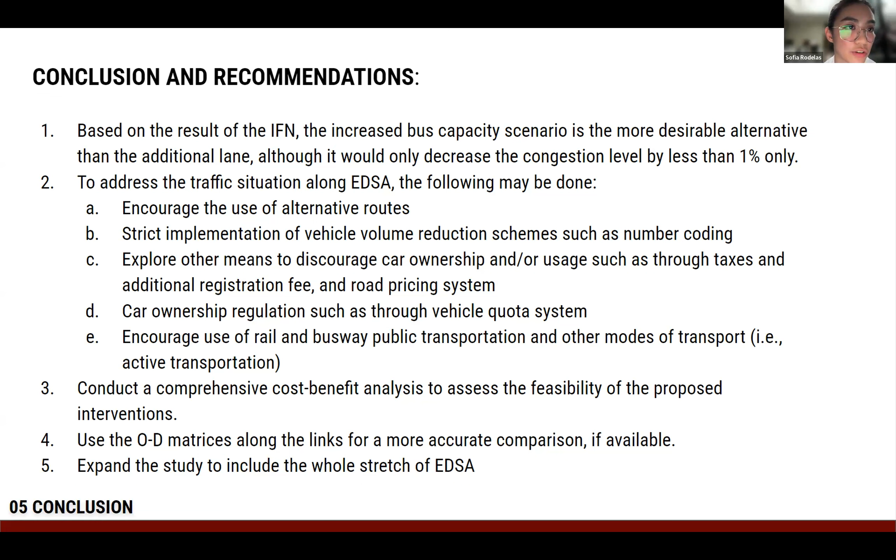So that's it for our report. Thank you very much. Very good.

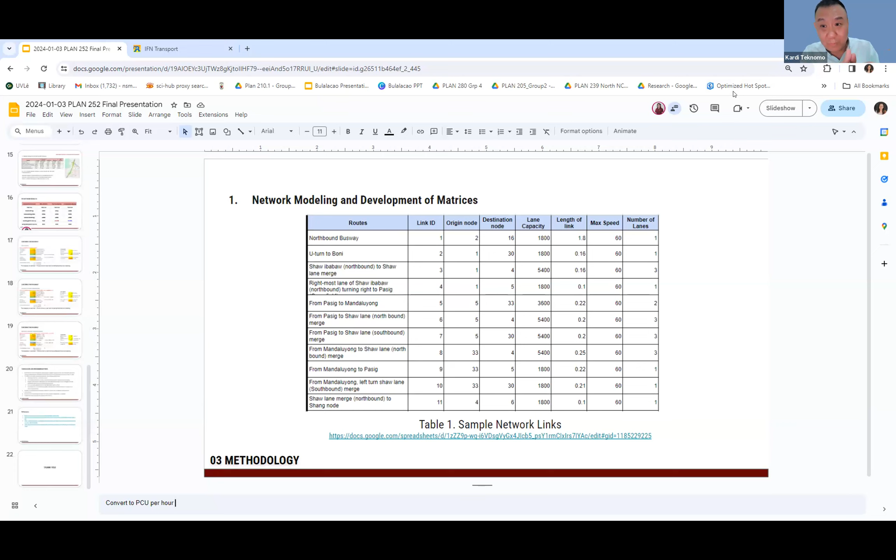Thank you, in overall I think it's very good. Is there any question to this group, or shall we move to the next group?

Just a comment, sir. I think the result that Sofia mentioned shows what you were telling us about, that sometimes it's really not necessary to add lanes, because their results showed that they improved just by doubling the capacity of the bus, and they actually improved the conditions. So what you were driving at, that most politicians or policymakers would always say add lanes, is actually not the solution all the time. Yes, but what they compute I'm still not sure, they need to justify the computation first. Okay, sometimes we can reduce and arrive at the same result. Right.

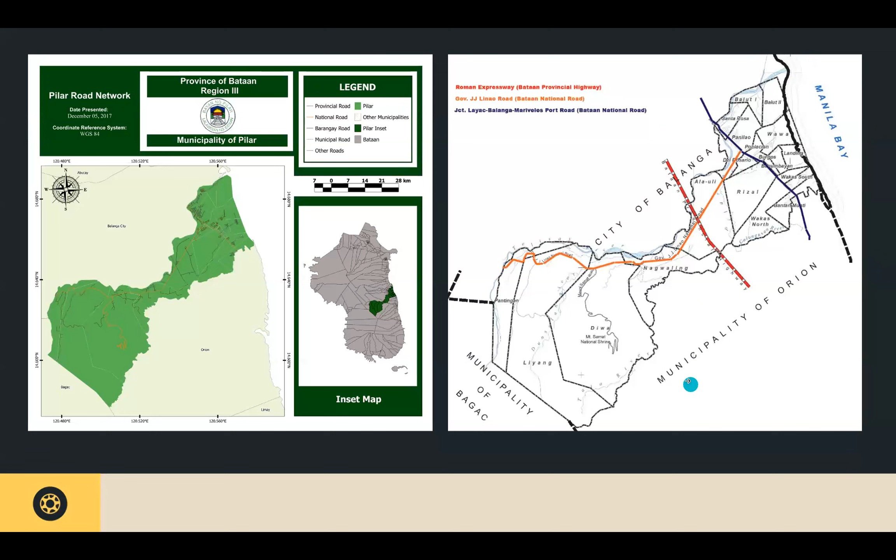Next slide please. For our study area, the group opted to choose the Pilar Central Business District, which is connected to the mixed-use character of its neighboring city of Balanga. Next slide please.

So just a quick background, because we've discussed it from our last meeting. To give a quick background on Pilar CBD, it was purposely put there as it facilitates seamless effort in catering to any overflow of urban sprawl coming from Balanga, which is the center of Bataan province. It is located on the north of Pilar, and then passing through Pilar going to Orion at the south area of Bataan. Next slide please.

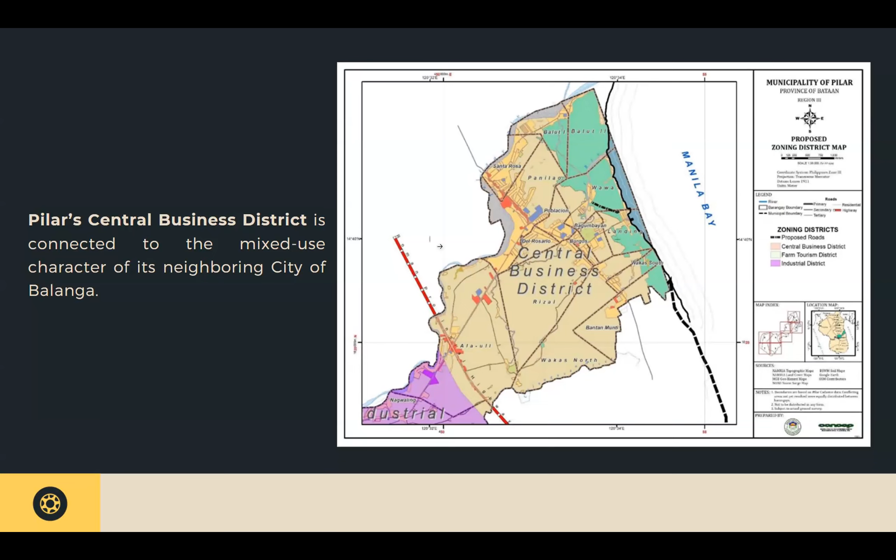As discussed by Marie, regarding the road networks, we'll just focus on Roman Expressway, Governor J.J. Linao Road, and the Bataan National Road, or the Jct. Layac-Balanga-Mariveles Port Road, because the Super Roman Highway caters to big buses such as Bataan Transit and Genesis, serving passengers coming from towns of Bataan going to Manila, and then minibuses and vice versa.

While for the PUJs, the jeepneys are plying from Balanga to Orion, the down area, the lower part from Pilar, and vice versa. Also the PUJs minibuses plying from Balanga to National Road and vice versa using the JJ Linao Road. Also the presence of colorum tricycles and private vehicles also use the National Road to cater passengers within the town point to point. Having that said, the CBD has attracted many public or private vehicles servicing the area.

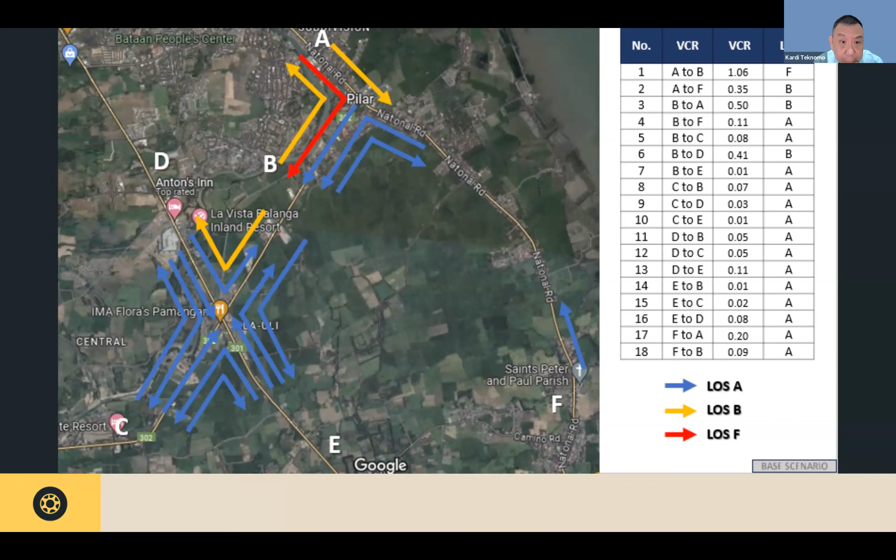So just to show you the flows we have determined, those are the flows. We have identified the link or the flow using the traditional method of getting the congestion or the VCR computation. We identified that link A to B reaches 1.06, or more than its capacity, so it got an LOS of level F. The rest of the links have an LOS of A and B. So this is that link.

And for our base scenario, we have also used the IFN transport network, using a total flow based on our actual AADT data that we have gathered. So our total flow is actually around 4,214 PCU per hour. And getting the base scenario, we identified that the maximum result...

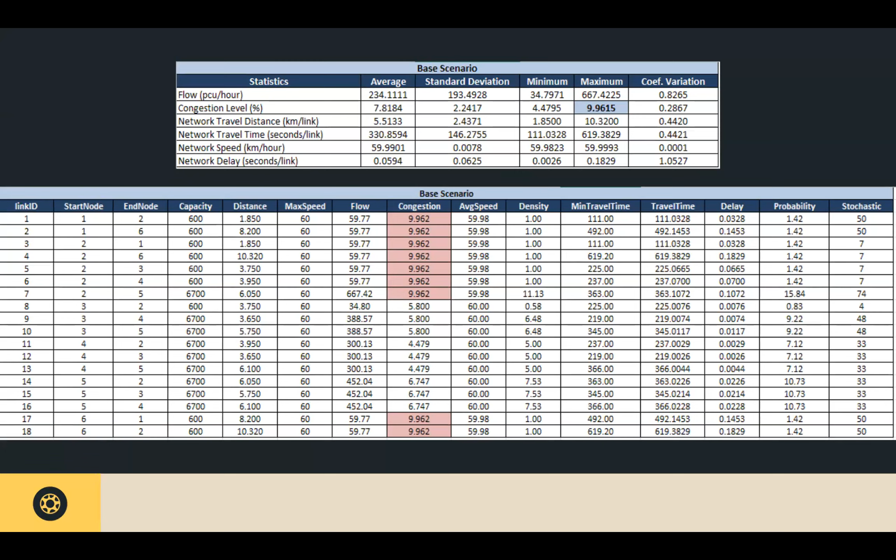So from here, the maximum congestion level is only around 9.96, or 9.9615. And then for the alternate scenario, what we did is we added lanes. Maybe I can just share the Excel file and show you.

Here's my Excel file. I'll just show you again this one. Are you able to see my screen now? Yeah, so from the actual AADT...

Using equal probability, since we have processed this, we did 0.5 for both directions for each node or each traffic survey site. I also computed this using equal probability for A to left, A through, then labeled as A to B, A to F. It's a tedious process in processing this data, that's why we did not change the topic anymore.

We followed, instead of the 8% factor that we use in DPWH, the recommendation of Sir to use 10%, as it is the usual percentage for the peak hour factor to get our AADT here, or the hourly. And then there we got the LOS.

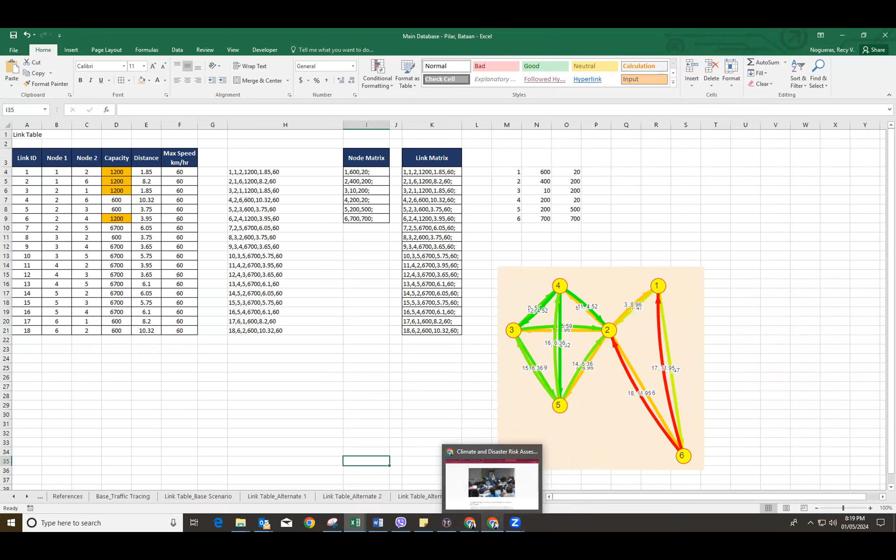Using a different link table for those 4 scenarios, we tested it in the IFN. In our IFN, the network is strongly connected, and our model used the total flow. We gathered 4,214 for the result of the base case.

From the last lesson, like what Prof said, adding a lane doesn't mean you're actually solving the congestion - you're just putting the congestion on a different link somewhere else. We can see this from the base scenario: original 9.96% congestion level. When you add one lane from A to B, it will have a maximum congestion level of 10%, but not necessarily on this link. For alternative 1, the congestion level for node A to B and B to A decreases, but you've increased congestion on other links such as these nodes.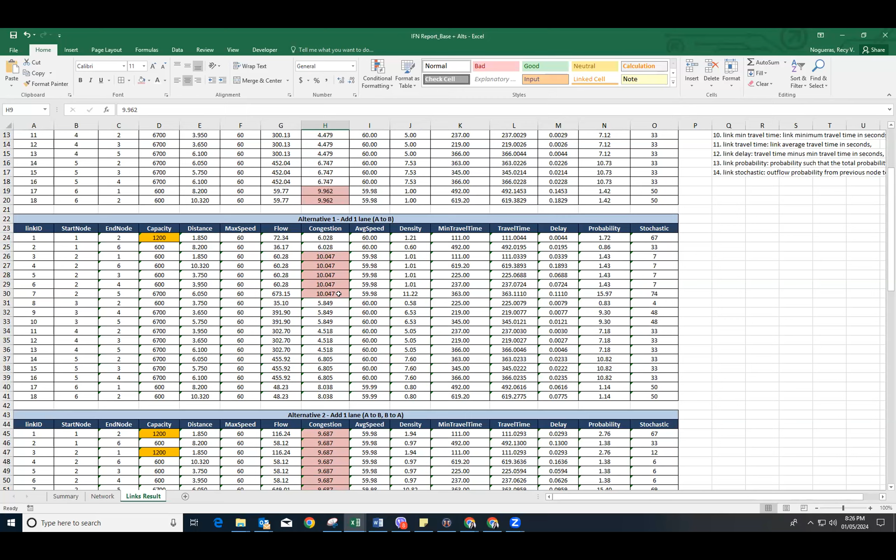And also, sir, if we have a better data set, we could have presented it better. It's just that the congestion level is too low, but you can see the difference, or for application purposes, you can see how adding the solution or the alternatives is changing the results in the congestion level of different scenarios.

That's it, okay sir, so I think it's very nice, interesting result. So is there any question, comments, suggestion, probably from other groups? Anyone?

Okay, I just wonder, how do you get that 4,214? Just added the total. Yeah sir, we just added the total peak hour factor result for all the links in the whole network. Yes sir, in the whole network.

But that's not including the dummy links, no? Ah yes sir, we have not yet included those.

Okay, have you ever considered, for example, because you already got the maximum congestion of 1.06, right? Yes sir. Have you ever considered using that link to be that particular reference point, to be 1.06 - for example you can adjust the flow in order to make that particular link 1.06? Ah, so we're just going to use the maximum congestion level of 1.06, sir.

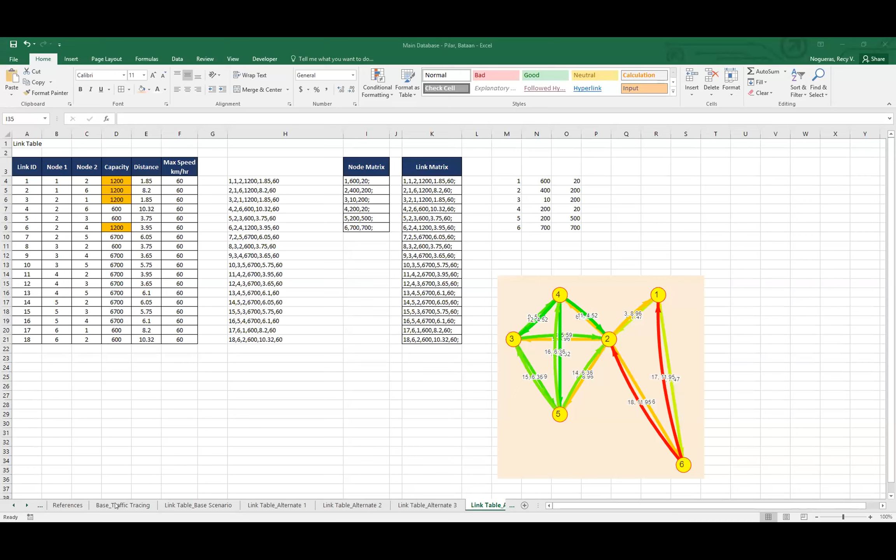And last question is, why do you use equal probability instead of, for example, capacity, the number of lanes? Sir, we use the equal probability here in the base traffic tracing just because we have used the probability of, for example, from A going to B, B going to right, A going to left, A to right, and A through. So if you have an AADT of 16,000, we have divided it 0.5 - the total flow here is divided 50-50 for each node.

Okay, so what you have is only in the nodes A, B, C, D, E, F. That's the AADT. Right? And then you want to know what is the traffic going here and there. You can use gravity model.

Gravity model, sir. Yeah, okay. Right, I know that you know the nodes and you want to know the distribution, right? That's exactly the gravity model, and then max congestion, right?

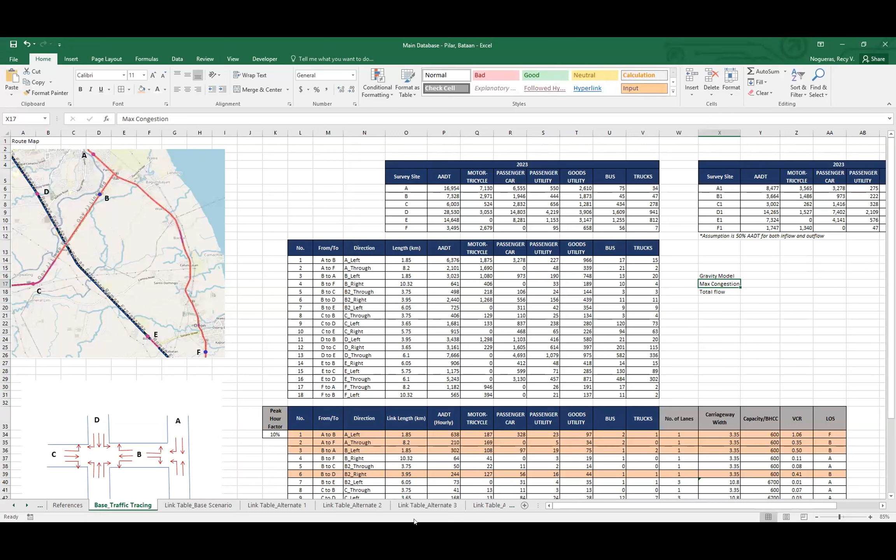So, because you want to get the OD, right? Basically, what you want. Is that correct? Yes, sir. Thank you.

Okay, so is that all? Any other group or any other particular person want to present? No more. Everyone already there, right? Okay.

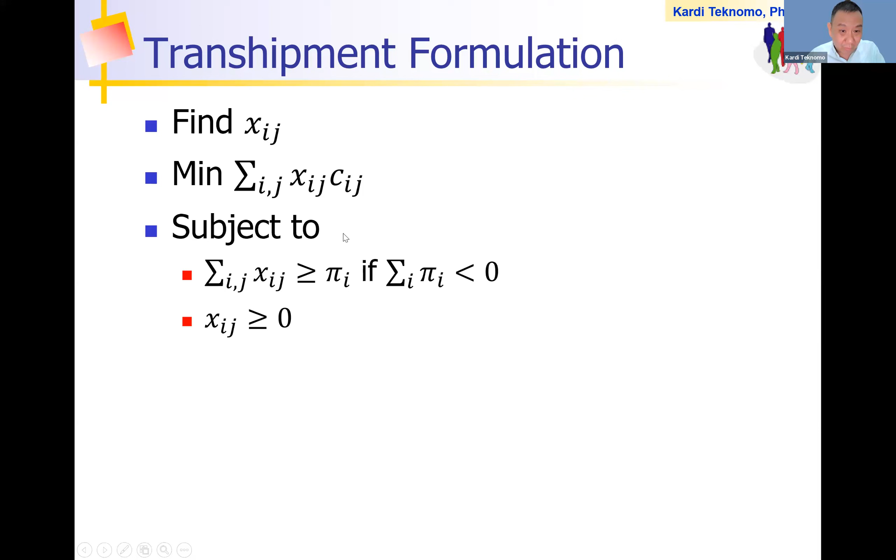Okay, so in that case, now you go to each node. In your slide, can you open this drawing? When you download the slide, can you open it? When we are offline, I will draw this in the whiteboard. Put this drawing so you can understand what I'm talking about. In your computer, open this drawing. Now I will show you this.

So in node A, can you see? We have negative XAB minus XAD, must be larger than minus 200. Do you understand the meaning?

Okay, AB, AD. Let's go to node A here. In node A, this is actually a source node, right? So going to AB and then going to AD. When going out, we put it as negative. Here, outlink is negative. Is it clear?

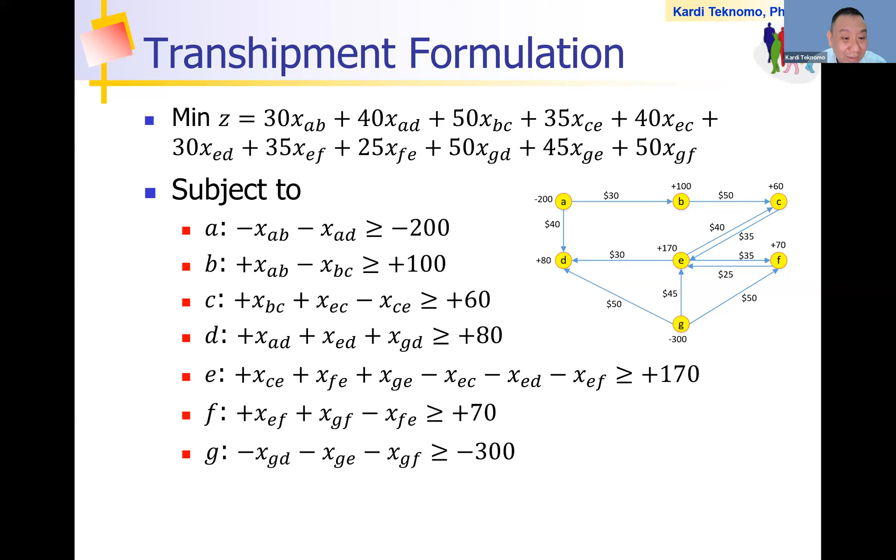Marie Grace: Sir, but for example in A, if this is -2, how can the formula be correct that -2 is greater than or equal to... This is just initial value, okay? Later we will do using solver. Initial value, you set all 1, right? When you use solver, this initial value -2 and so on is because you put the flow all 1. Okay, so this is just initial value.

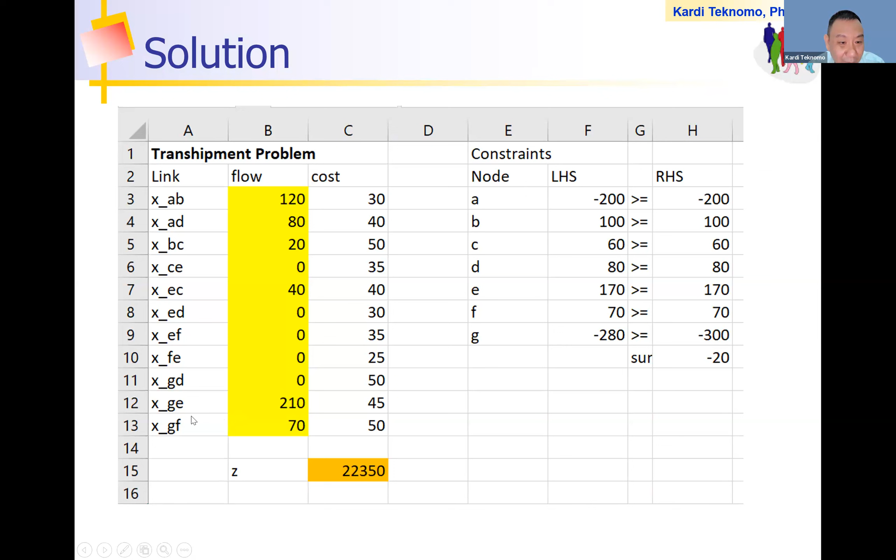Once you set up this constraint and the flow and make this positive, non-negative, and then you solve, then you will get this value. This is the result. So this is the optimum value, which is nice. You see, for example ED, you don't need to have any flow. GE, so these are the flow that you actually put in. So I put this flow here back into the network, then you will see the solution.

So I will transport 120 from A to B, and then 80 from A to D. From B, I will transport 20 to C, and then 40 from E to C, and then 210 from G to E, and then 70 from G to F. These are the solution, yeah. The one in red here, I put the solution. So there is no need to transport from G to D, for example. So this is the optimum solution.

So this is very nice for logistics, isn't it? If you want to transport things from one port to another, from one center to another, this is very useful model. I know this is not necessarily transport for the government, but one day some of you may work in a logistics company, right? And then you already know the solution. For business, it's very important. This is very important for business, correct?

For big businesses, sir, like for example, I used to work for Emperador, one of the distilleries here in the country. I've been the one assigned in transporting or assigning the shipments for molasses. Molasses is the raw material that we use to extract the alcohol for making alcohol drinks like Emperador. It costs them millions of money just to transport a specific amount of the raw materials. That's why I know this technique is very important. Yes, this kind of model is very important for this kind of problem.

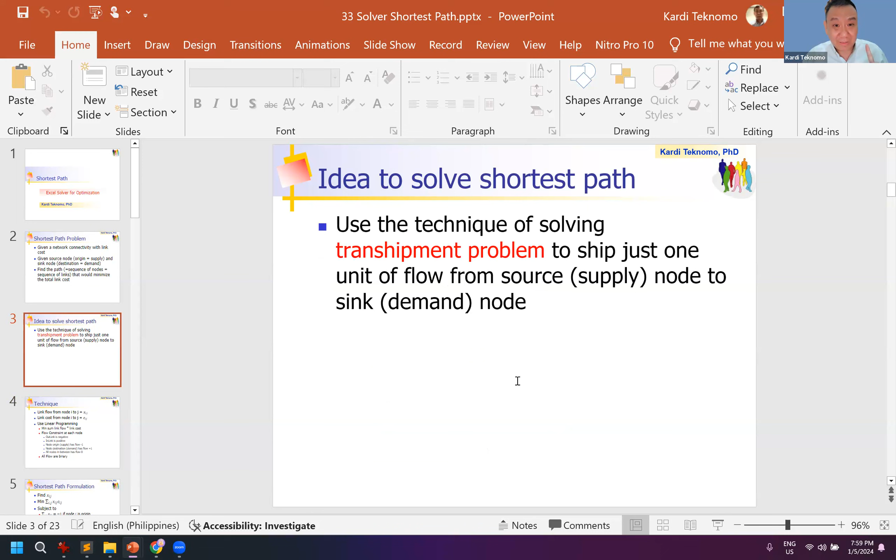Next part - last time we did the shortest path, right? So I want to link back. When we did the shortest path, that's exactly the same as transshipment. They use the same technique as the transshipment problem. The only difference is this is actually simpler, because you only use one unit flow from the source to the sink. You already did this last time as your assignment, right? So it's exactly the same. Transshipment is actually more general, even more general than that. Okay, last but not least, I don't know if you are going to work for a piping company.

Okay, for example, pipe of the gas, pipe of the water, or probably pipe of the oil. So this is the problem that you need to solve, which is called the maximum flow problem. So the problem is this, yeah?

You have a source, okay, where the origin is, and then you have the sink. Each link has a capacity, which is the physical capacity, meaning the maximum flow that can pass through that link. Now the question is, determine the maximum flow that can pass the whole network. You know the capacity on each link. Now the question is, for this network, what is the capacity of the network? It has no supply and demand node actually, but it has only source and sink.

So again, the application is for oil, gas, water, and so on. This is pipeline. Well, you can use it for transportation too, to determine the maximum number of cars that can travel for the whole collection of streets, right? So each street will have capacity in terms of number of lanes and the speed limit and so on. So these are the applications.

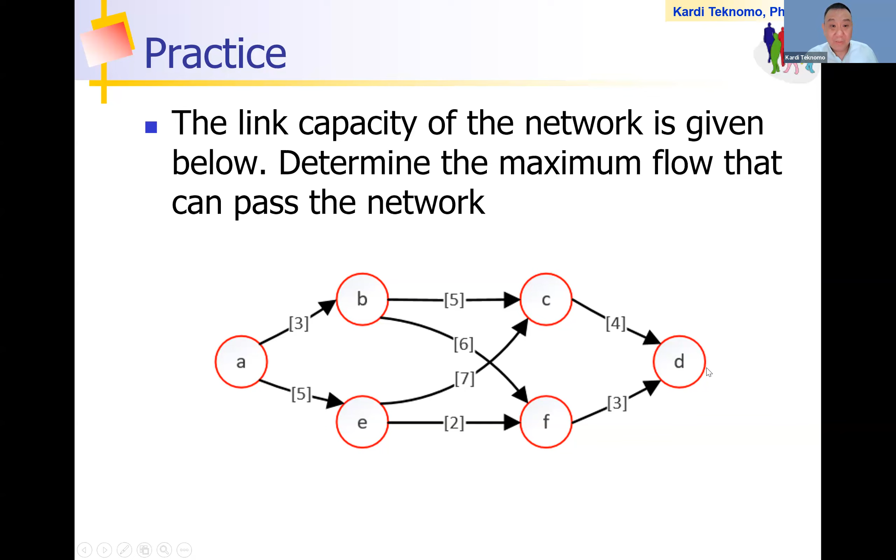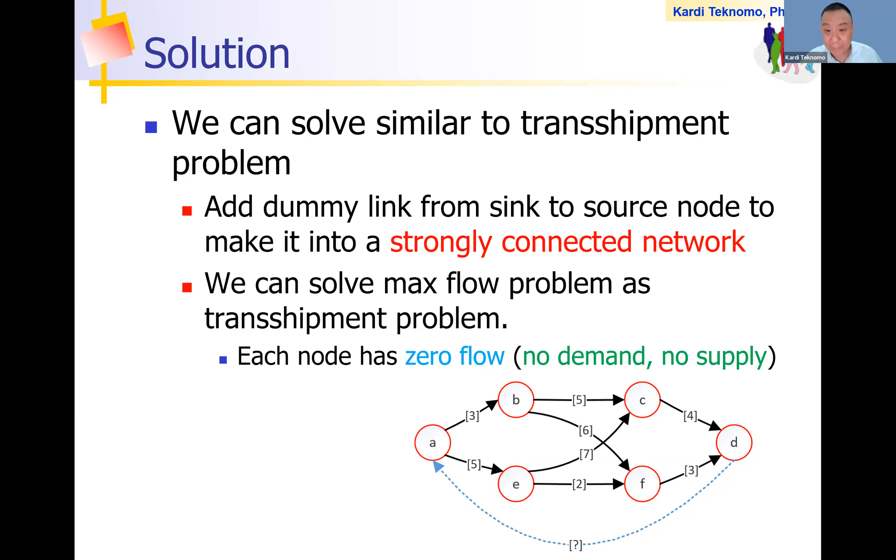Remember, each node now has zero flow because there's no demand and no supply. So it's the same technique as a while ago. What you want to get is actually the maximum flow in that dummy link here, XDA. This is the maximum flow for the network. So that's the meaning of the dummy link here. And the technique is the same. You put in as positive, out as negative. But remember, because we don't have demand and supply, everything is equal to 0.

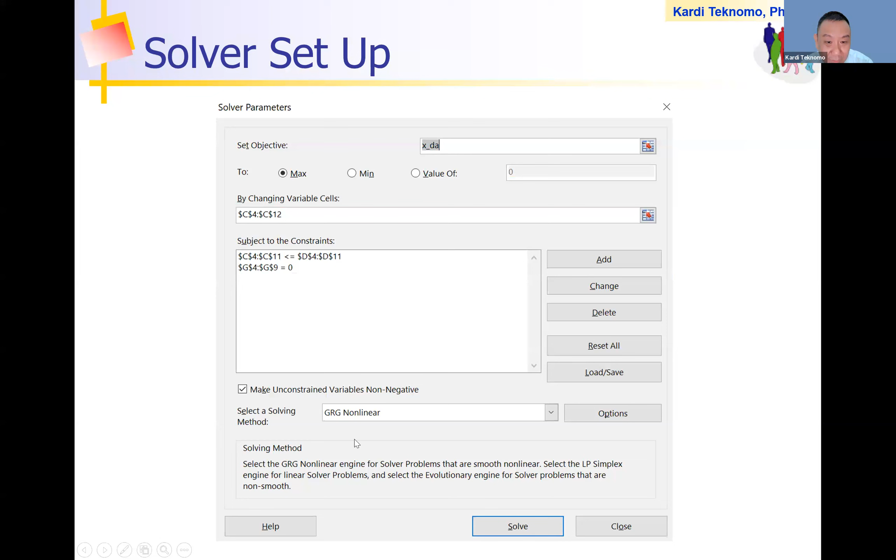And then you have the capacity here. So that means the value of flow of XAB is between 0 to 3. That's the capacity. So you put the capacity as a constraint, and the capacity of this dummy link is infinite. Then you just put this into Excel as usual, with capacity infinite for XDA, and then you use solver, the same thing, and you will get that value is 7 in the example.

So that means the whole network can only accommodate 7 units of flow. Is there any question up to here? We want to know the capacity of the whole network instead of given the link capacity, how many cars in transportation can we accommodate in the whole network? You can calculate using this technique. If you want to know, for example, you want to get gas or oil from the source of the mining up to all the distribution, through all these different networks of pipeline, then you want to ask how many liters or how many barrels can we pass of this oil? Network capacity.

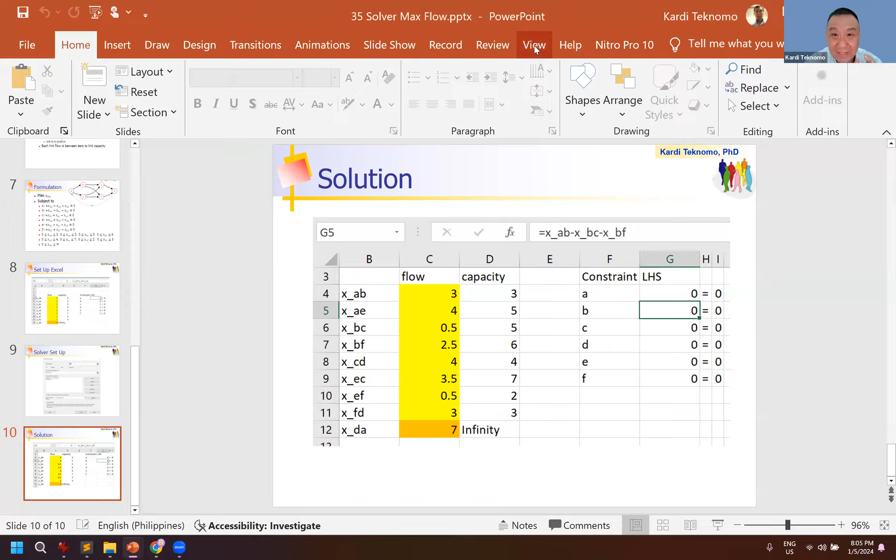Same procedure again for the final exam. You'll open the exam for the whole day. Now the question is how many attempts. Let me ask you now. Three? You want three?

Okay, so if you have more than one attempt, I will hide the answer first. That means I will open the answer the following day. Is that okay? Yes, sir.

You will get the grade right after you submit all the exam, but you will only see the grade, not the answer.

No problem. So because the exam is open from morning until night, you can take it any time. And then it's the same three attempts, for the highest score. Of course, highest score, no problem.

Sir, so to clarify again, the deduction for the wrong answer is 10%. For the 10%, yeah, so 10% deduction.

So in that case, if you answer all, you will surely get a very good grade already. The purpose is to make you get a higher grade rather than just a standard grade.